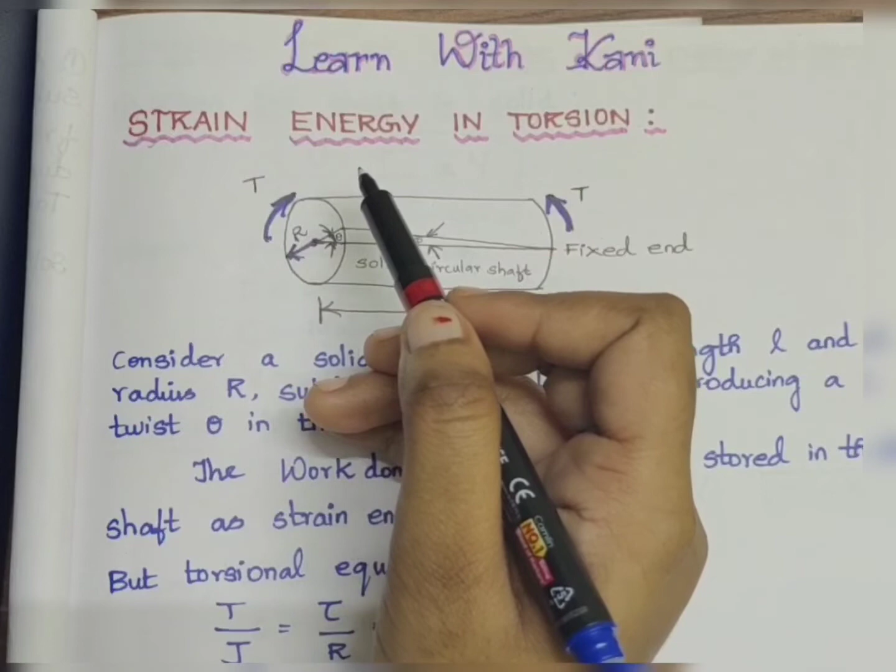Today's topic is about strain energy in torsion. Generally, what is strain energy? Strain energy is basically defined as the internal energy stored in the body when the body is subjected to a load within its elastic limit. We must ensure that the load applied over the body is within its elastic limit, that is, after removal of load, the body must regain its original dimension.

So, strain energy in torsion. Here I have drawn a solid circular shaft. Consider a solid circular shaft of length L and radius R. I have denoted the length L here, and the radius R is shown from that point to the end, that is radius, and it is subjected to a torque T, producing a twist theta along the length of the shaft.

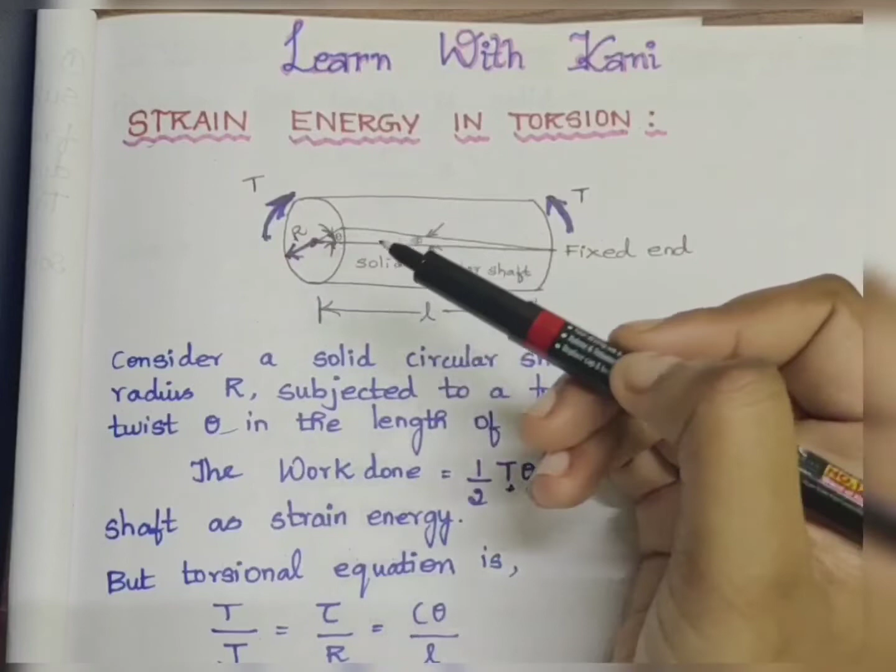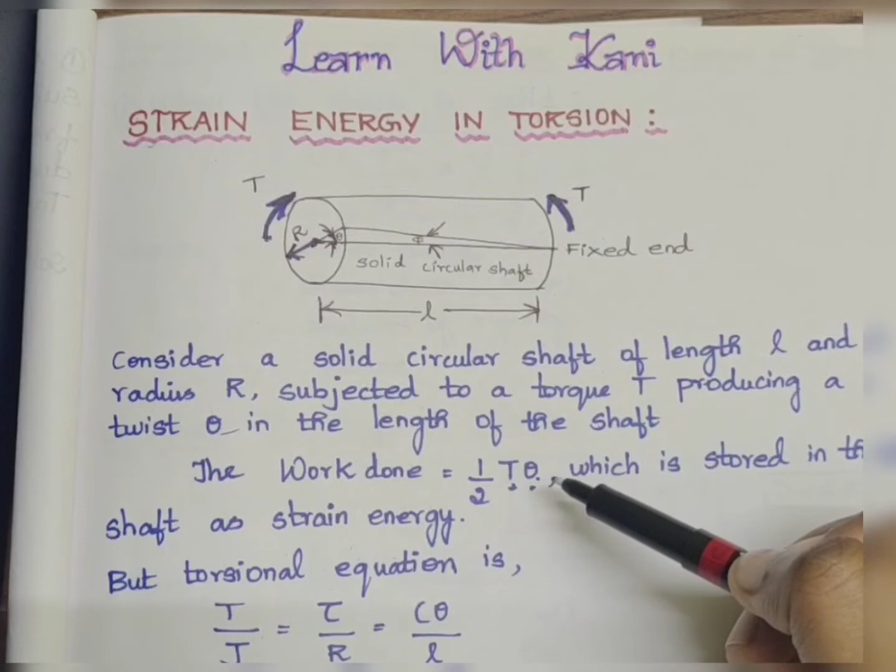Here I have drawn a torque at both sides because it acts at both sides, and due to this, an angle forms, that is the twisting angle theta, along the length of the shaft. This torque produces a twist, and this twist forms an angle theta. Now the work done is equal to half into T into theta, which is stored in the shaft as strain energy. Generally, torsional energy or strain energy is equal to the work done by the torque, which is equal to average torque into angular twist.

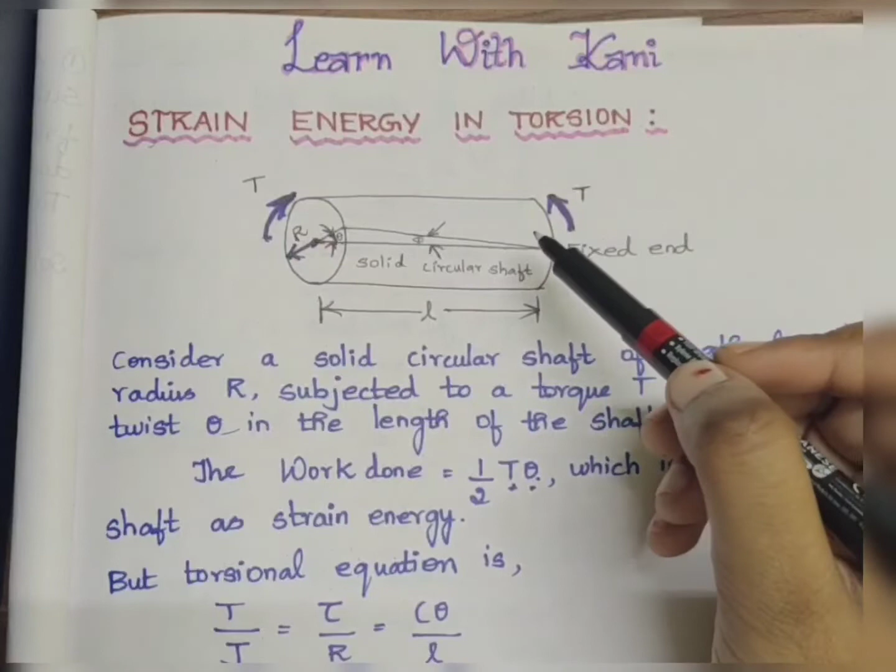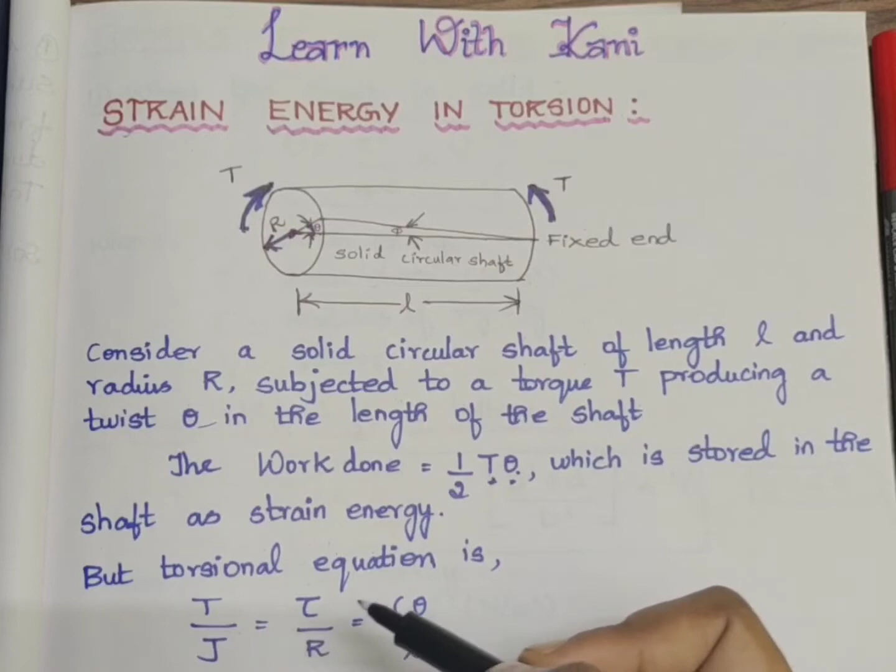Next, the torsional equation is T by J is equal to tau by R is equal to C theta by L. First, let us learn the full form of each term. T is nothing but torque applied, and its unit is Newton meter. J is nothing but polar moment of inertia, and tau is nothing but shear stress on the surface of the shaft, with unit Newton per meter square.

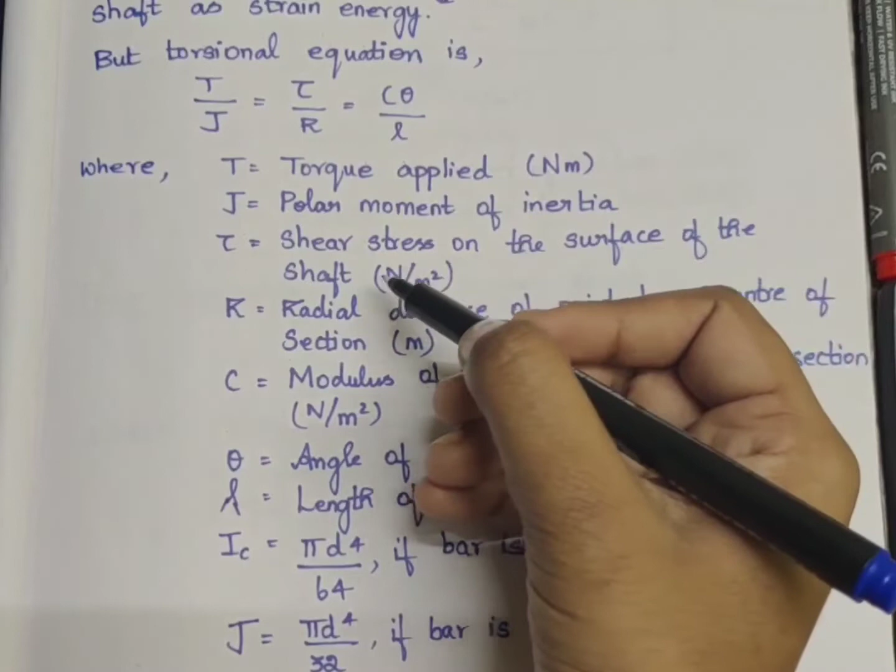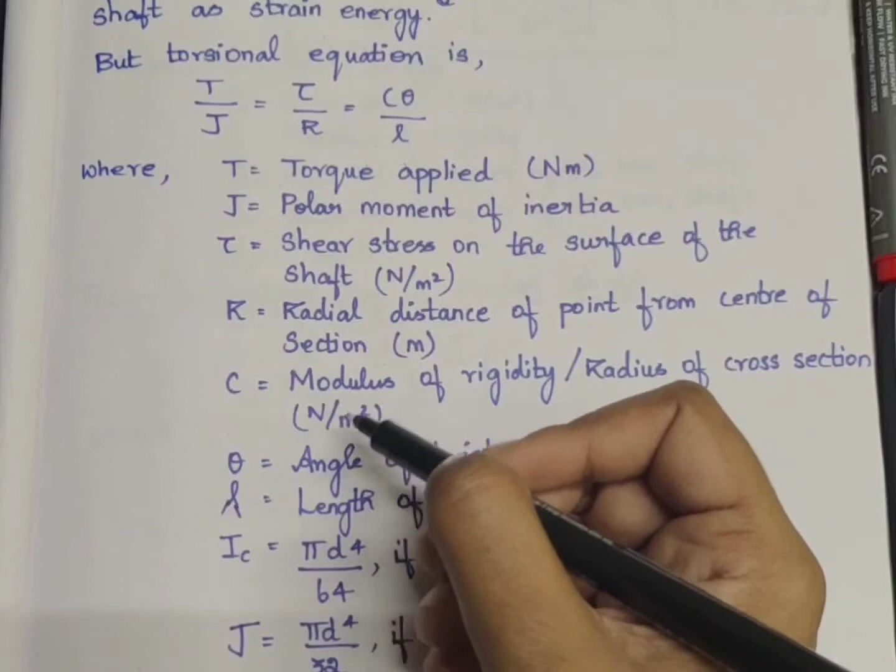R is nothing but radial distance of the point from the center of the section, and it is in meters, as it is a distance. C is nothing but modulus of rigidity, with unit Newton per meter square. Theta is nothing but the angle of twist, and L is nothing but the length of the bar or shaft, in meters.

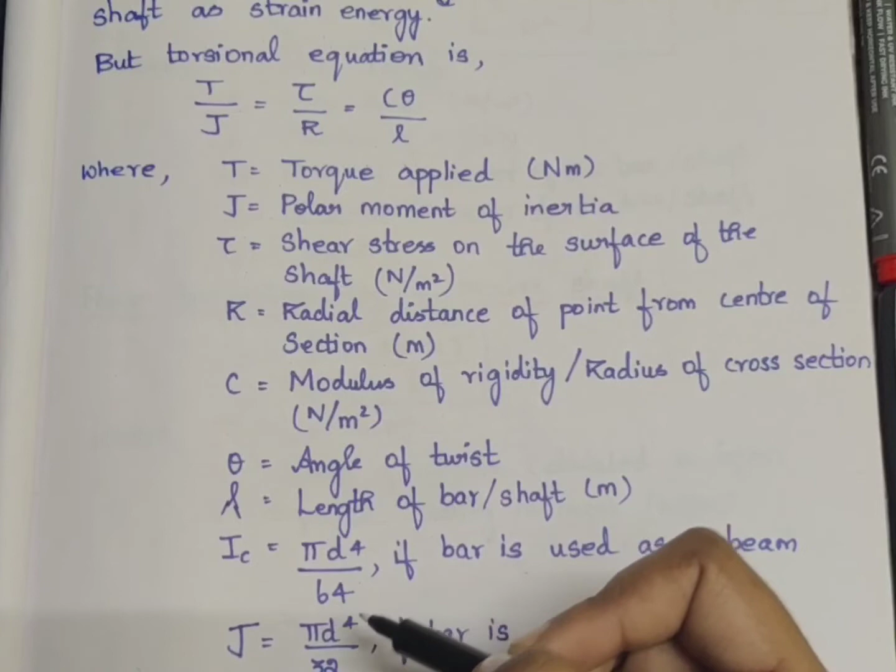IC is equal to pi d power 4 by 64 if the bar is used as a beam. If the bar is used as a beam, we should use the formula pi d power 4 by 64. If the bar is used as a shaft, then we have to use J is equal to pi d power 4 divided by 32.

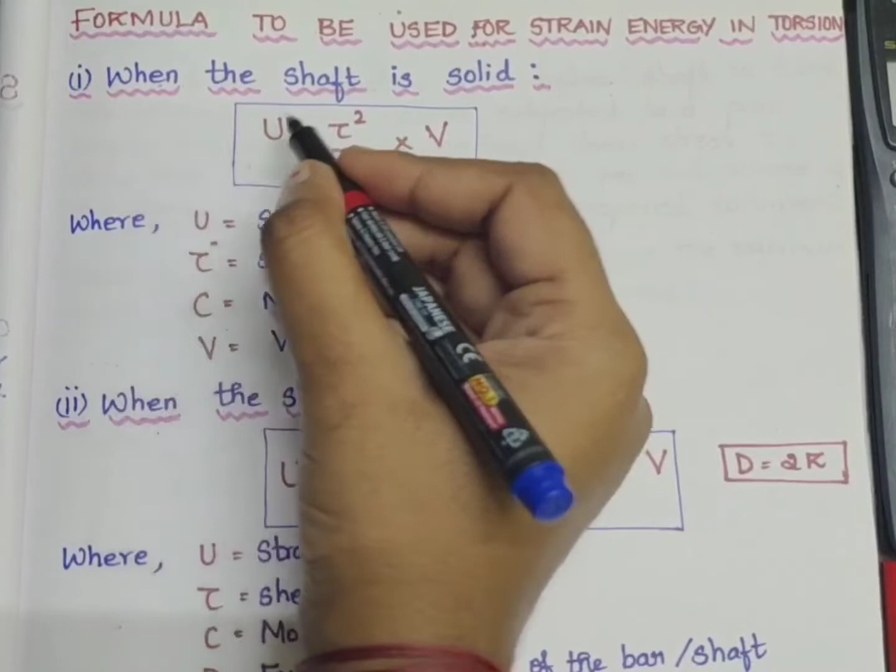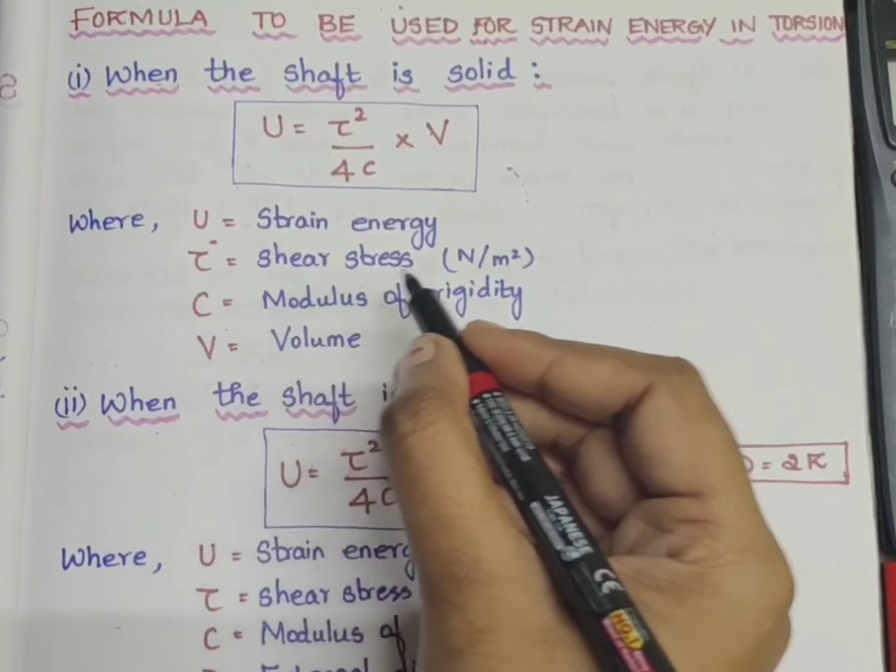Then, formulas to be used for strain energy in torsion: when the shaft is solid, U is equal to tau square divided by 4C into V, where U is the strain energy, tau is the shear stress with unit Newton per meter square, and C is the modulus of rigidity, and V is the volume.

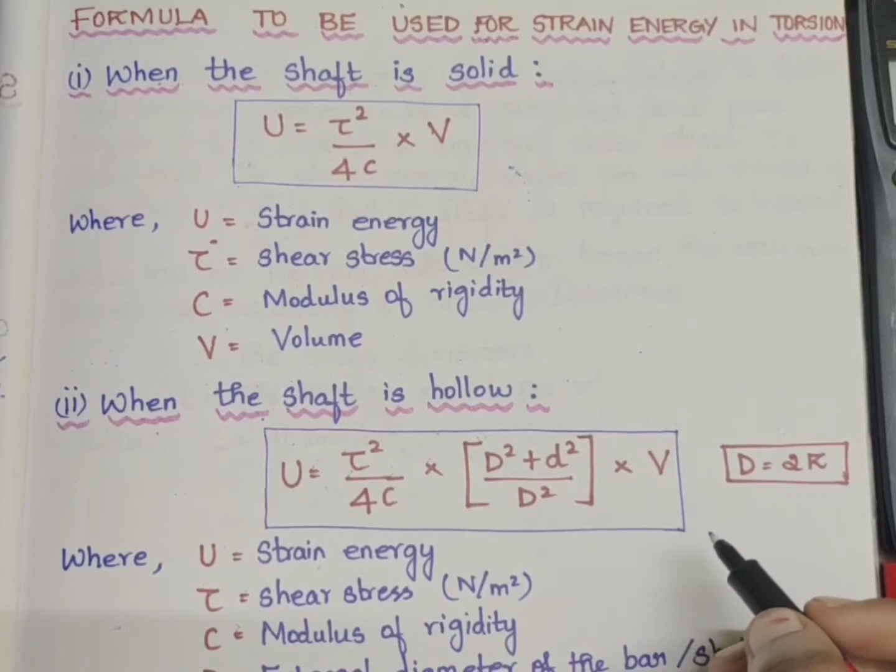When the shaft is hollow, here I have drawn a solid shaft, but in case the shaft is hollow, we have to use the formula U is equal to tau square divided by 4C into open bracket capital D square plus small d square divided by capital D square, into V. Here capital D is nothing but 2 times the radius, as we know diameter is 2 times the radius.

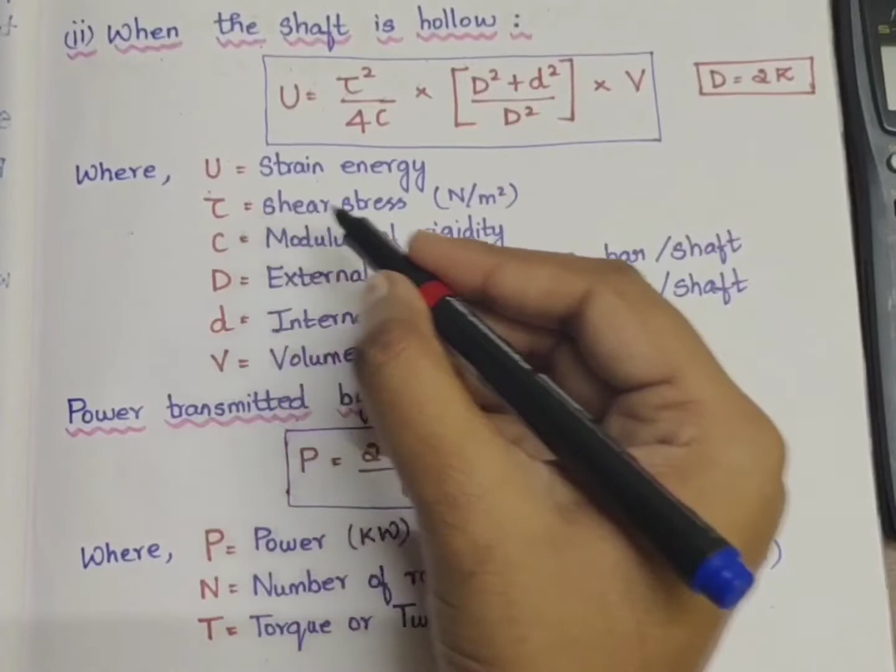Where U is nothing but the strain energy, tau is the shear stress, C is the modulus of rigidity, capital D is the external diameter of the bar or shaft, small d is the internal diameter of the bar or shaft, and V is the volume.

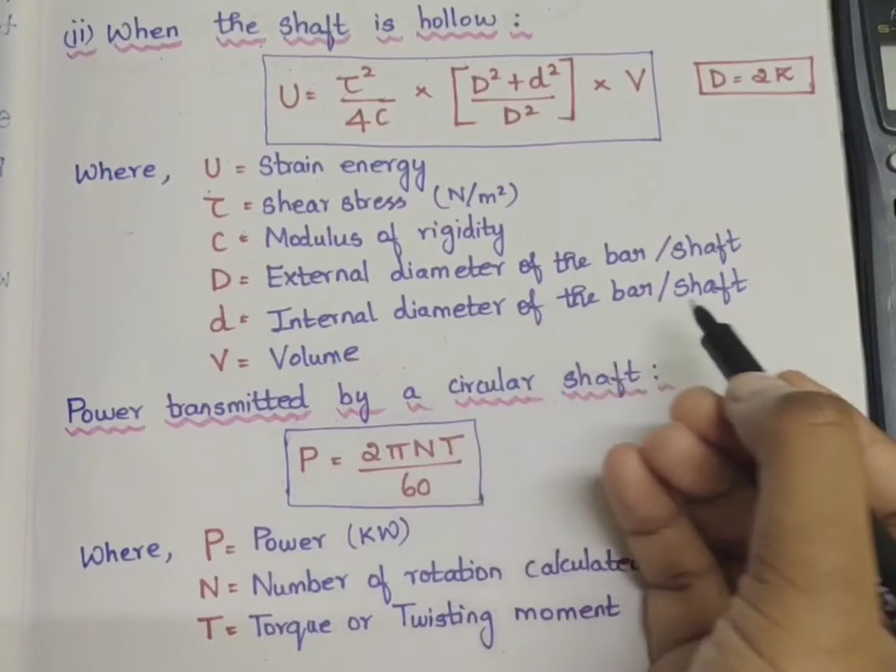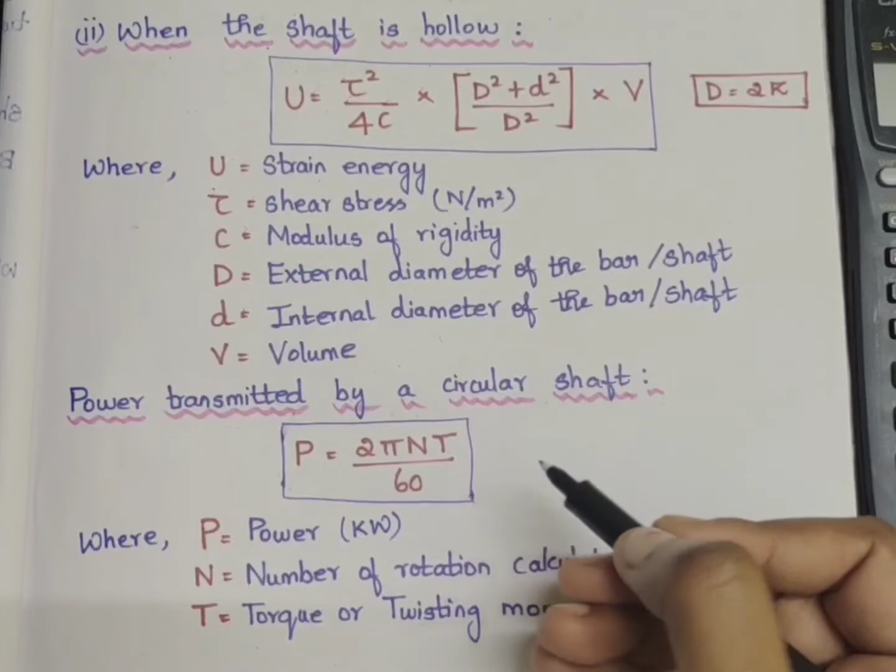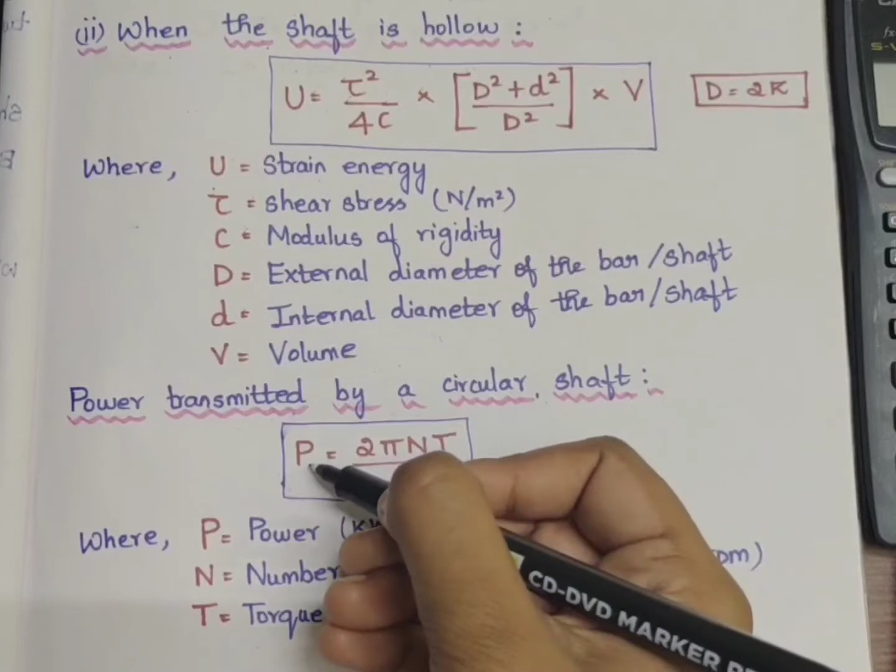Now power transmitted by a circular shaft. For this we need to use the formula P is equal to 2 pi NT by 60, where P is the power with the unit kilowatts, N is the number of rotations calculated in RPM, and T is the torque or twisting moment with the unit kilonewton meter. That is the unit for torque.

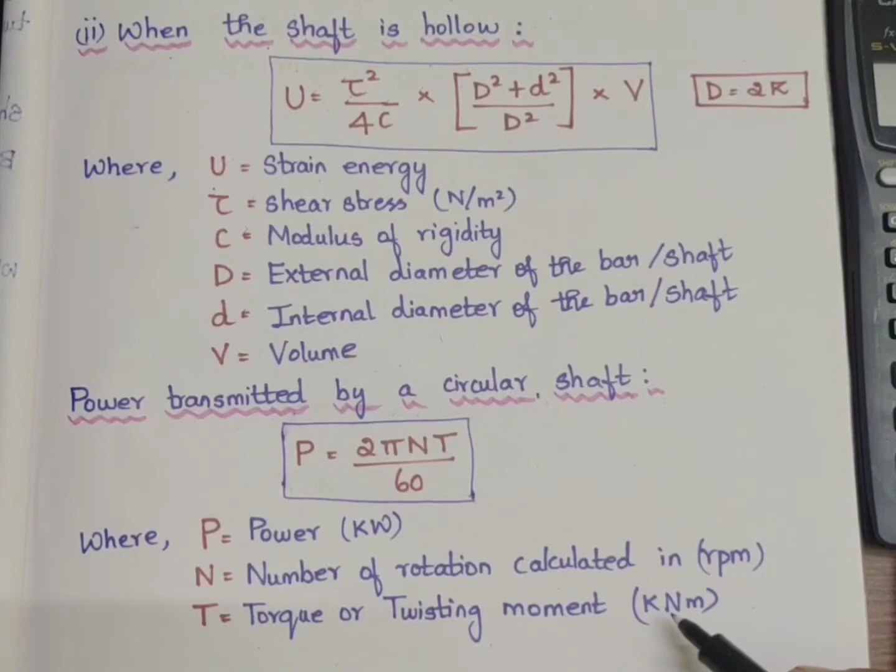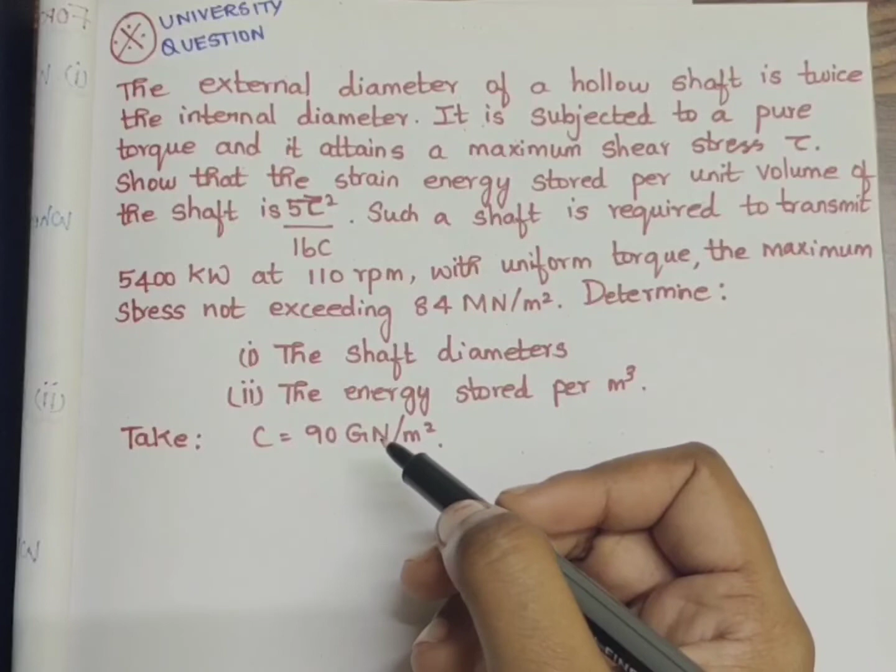Now moving on to the question. It is an important university question. The external diameter of a hollow shaft is twice the internal diameter. It is subjected to a pure torque and attains a maximum shear stress tau. Show that the strain energy stored per unit volume of the shaft is 5 tau square divided by 16C. Such a shaft is required to transmit 5400 kilowatt at 110 rpm with uniform torque. The maximum stress not exceeding 84 meganewton per meter square. Determine first the shaft diameter, second the energy stored per meter cube. Take C is equal to 90 giganewton per meter square.

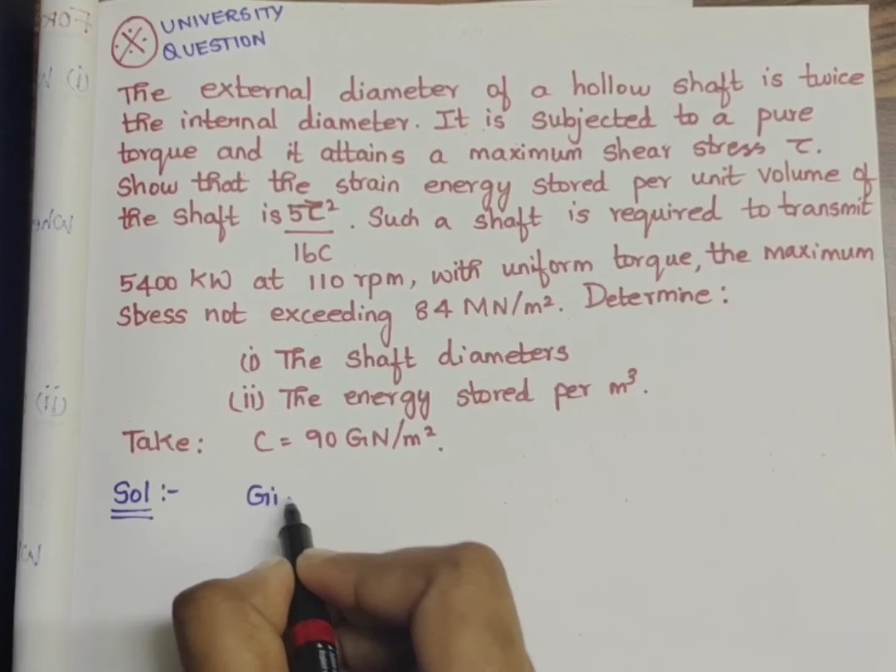Now moving on to the solution. First I am writing the given data here. In the question they have said show that the strain energy stored per unit volume of the shaft is 5 tau square divided by 16C.

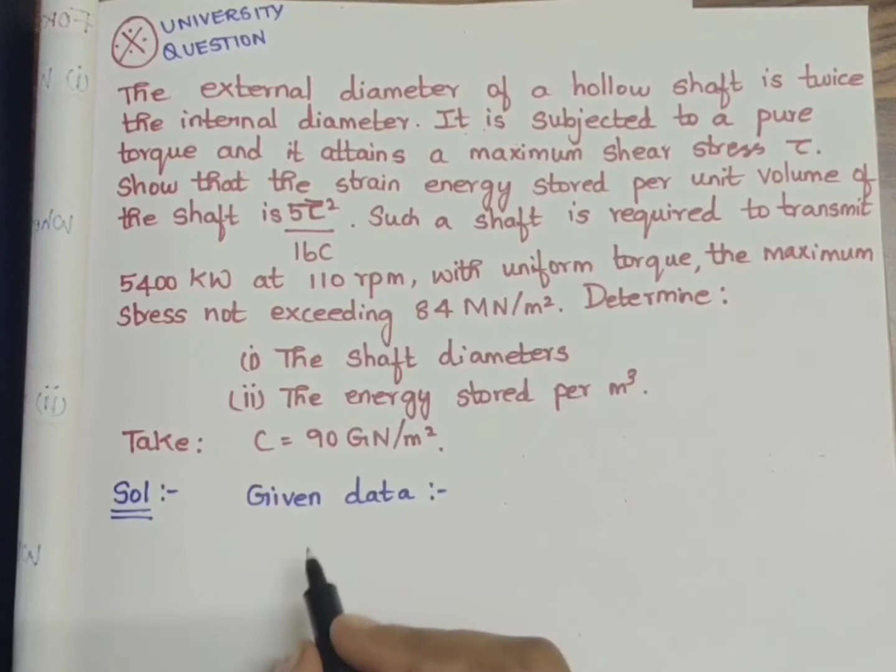So strain energy is denoted with the symbol U. Divided by unit volume they have mentioned, so divided by unit volume of the shaft is 5 tau square by 16C. I am just writing what they have given in the question.

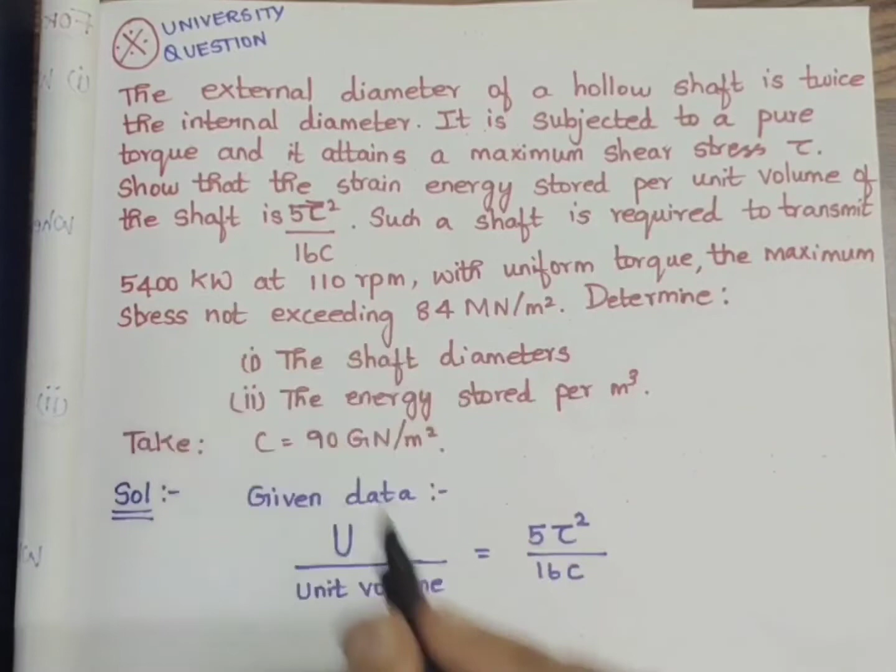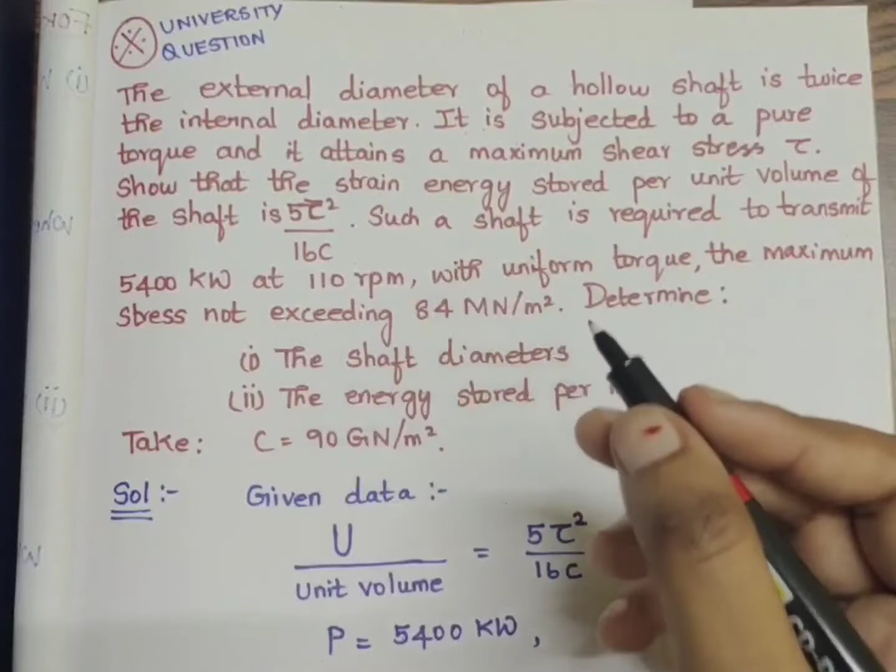Now such a shaft is required to transmit 5400 kilowatt, so they have given the power. Power P is equal to 5400 kilowatts. Now at 110 rpm, we know that rpm is denoted with n. So n is equal to 110 rpm.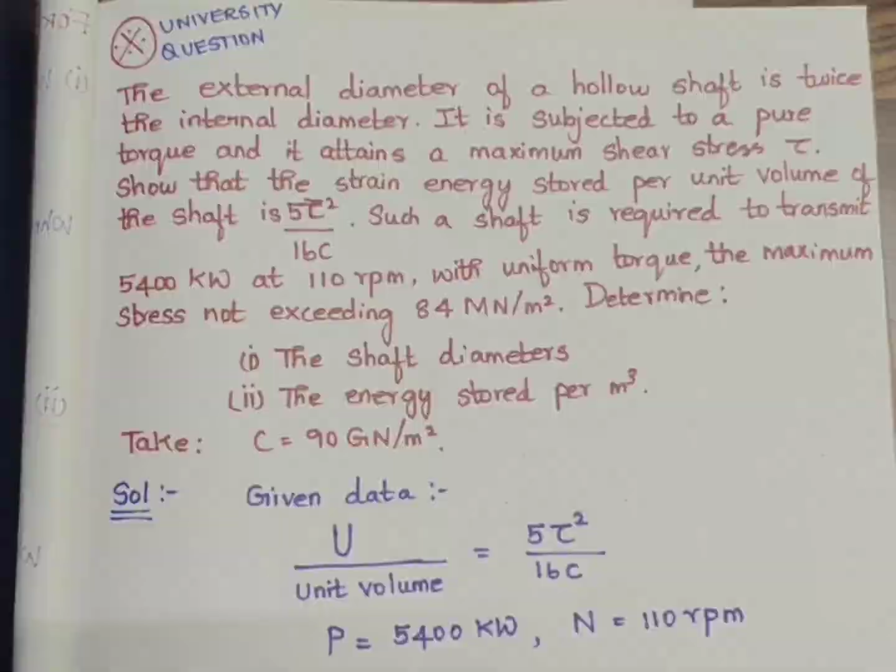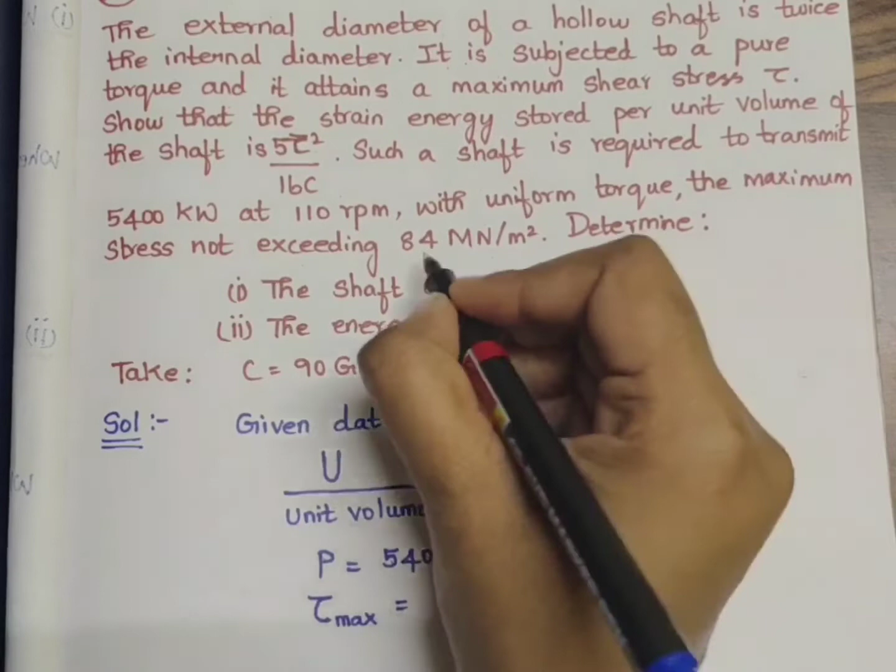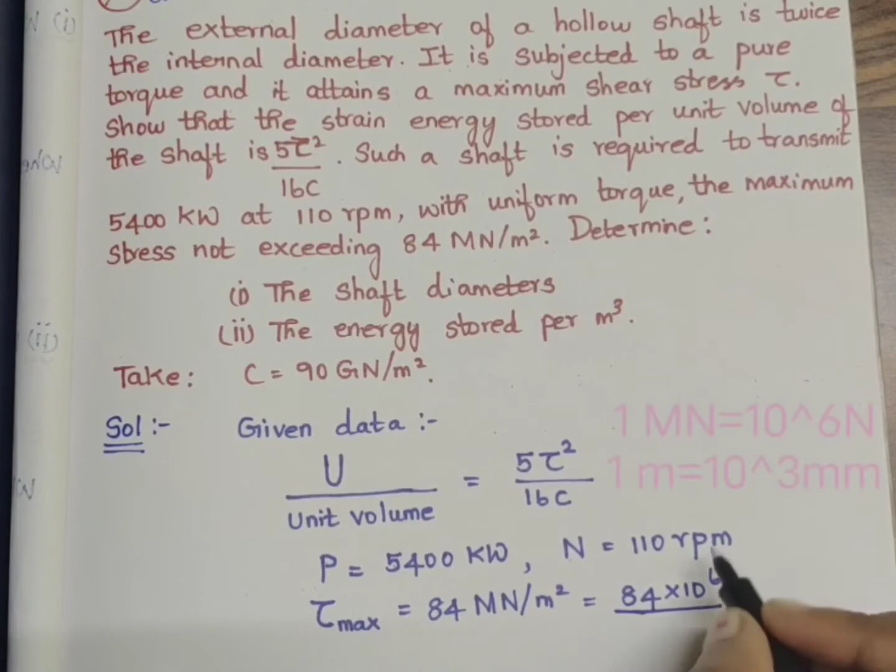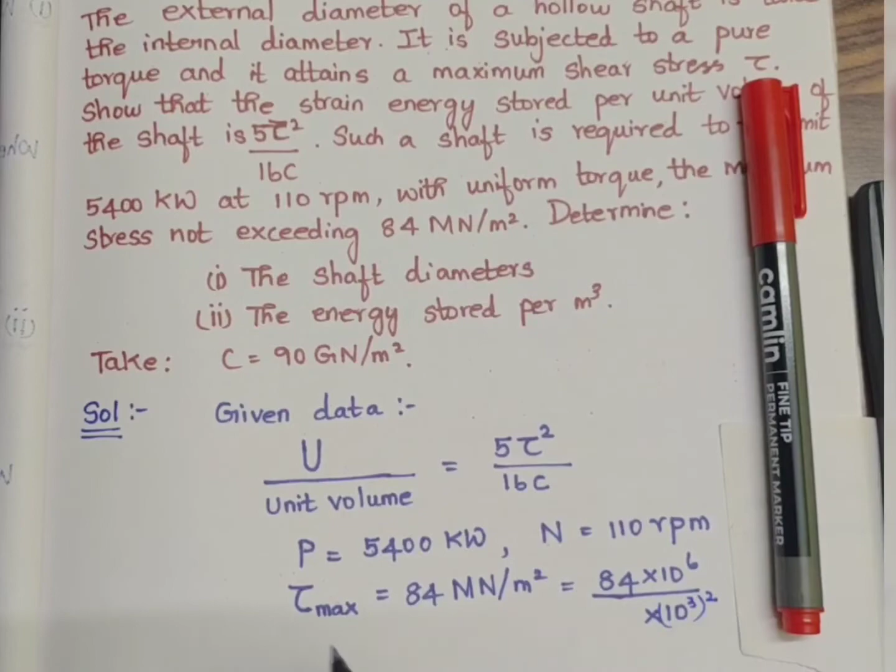Now the maximum stress not exceeding 84 meganewton per meter square. We know that stress is denoted with the symbol tau. Maximum stress, so tau max is equal to 84 meganewton per meter square. Now we are going to convert it into newton per mm square for easy calculation. We know that 1 meganewton is equal to 10 power 6 newton and 1 meter is equal to 10 power 3 mm. Just doing a simple conversion from meganewton and meter to newton and mm square: 84 into 10 power 6 divided by meter square, so 10 power 3 the whole square, which is 10 power 6. Cancelling both, it will be 84 newton per mm square.

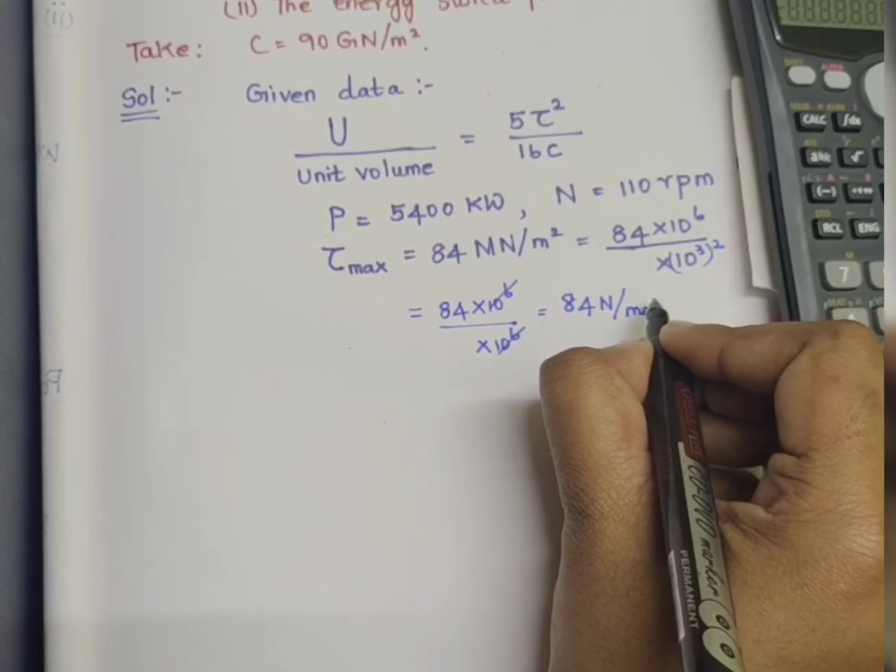So tau max is equal to 84 newton per mm square. We are just converting this for the purpose of units. So tau max is equal to 84 newton per mm square.

Now power is equal to 5400 kilowatt. We have to convert this into watts. It is nothing but 1 kilowatt is equal to 1000 watts. So applying this for conversion, I am writing 5400 into 10 power 3 watts.

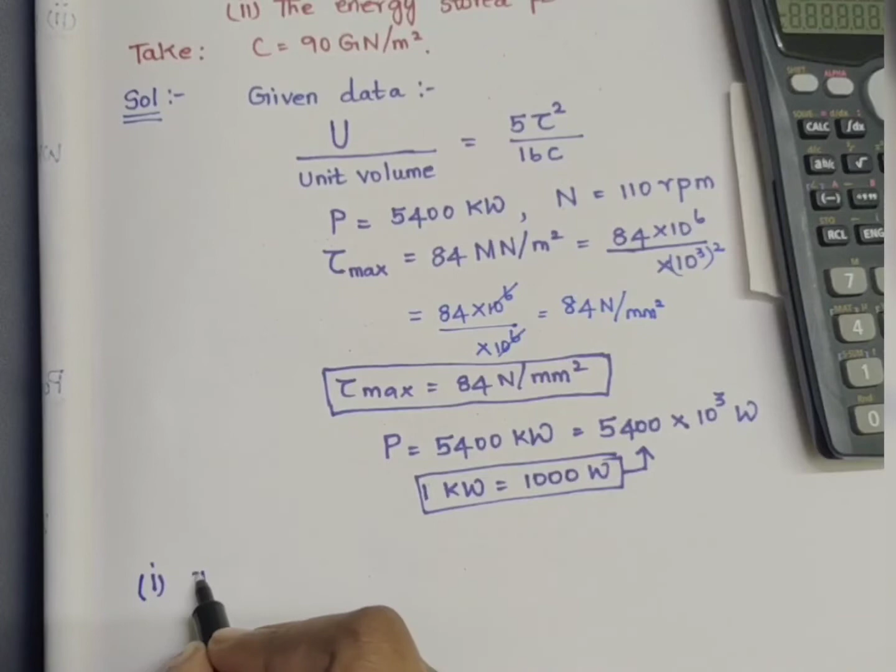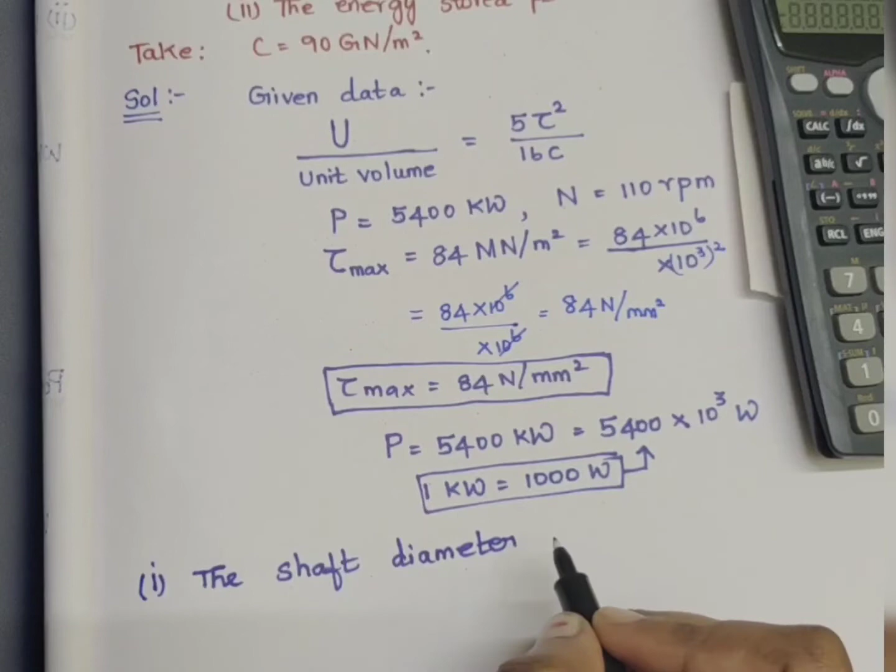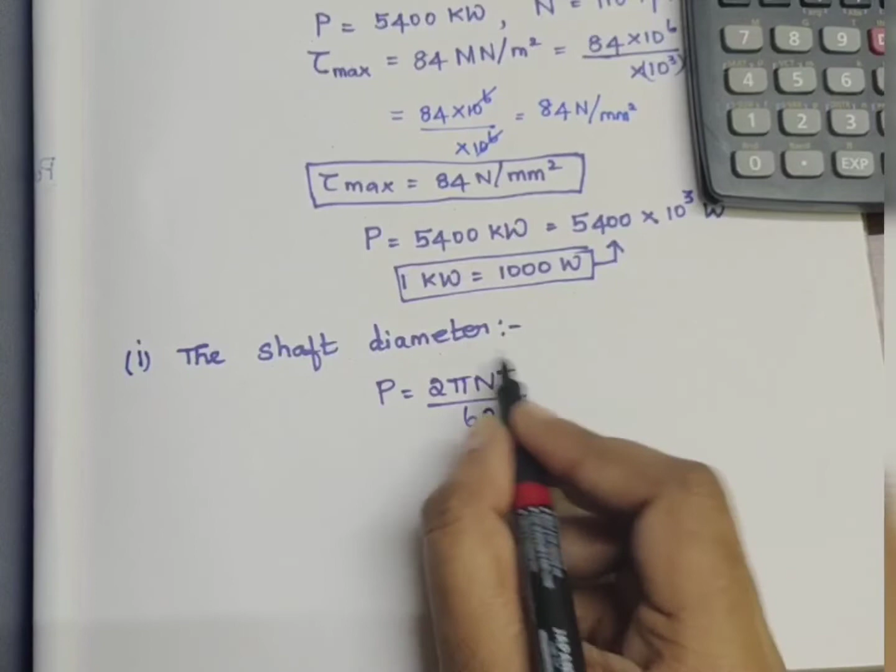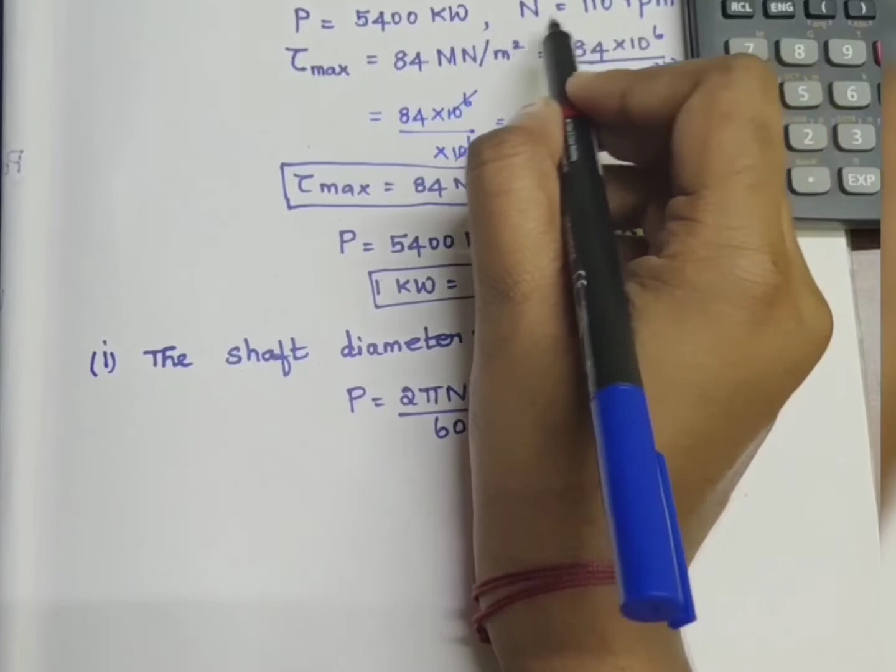Now in the question they have asked us to determine the shaft diameter. So the first part is the shaft diameter determination. For this we are going to use the power formula, P is equal to 2 pi NT divided by 60. We are using this formula because they have given the power value and n value, and when we find T, with that we can go with the torsional equation, and with the torsional equation we can find the diameter. That is the logic here.

So to determine T we are using this power formula, as they have given the values related to power and number of speed, that is n. So just rearranging this, T is equal to P into 60 divided by 2 into pi into n.

So value of P is 5400 into 10 power 3 into 60 divided by 2 into pi into n, where n is nothing but 110. I'm just showing how to do this in the calculator.

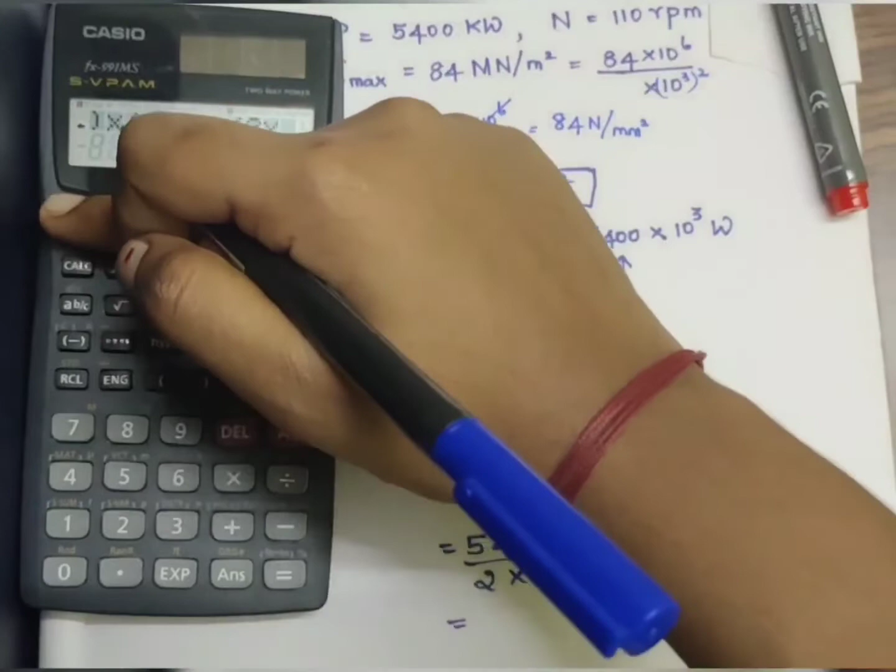First give double bracket, then 5400 into 10 power 3, close the bracket, then into open bracket 60, close it, close the overall bracket, then divided by, open bracket, 2 into pi. We are just going to substitute pi as pi itself, not 3.14. Just giving shift and exp, we get the pi symbol, then into 110, closing the bracket. So the value is 4 6 8 7 8 3.

I am just leaving after the point value, so it is just 468783 Newton meter, as torque unit is Newton meter. I'm just writing that T is equal to 468783 Newton meter, so into 10 power 3 Newton mm, for just a conversion purpose, converting meter into mm.

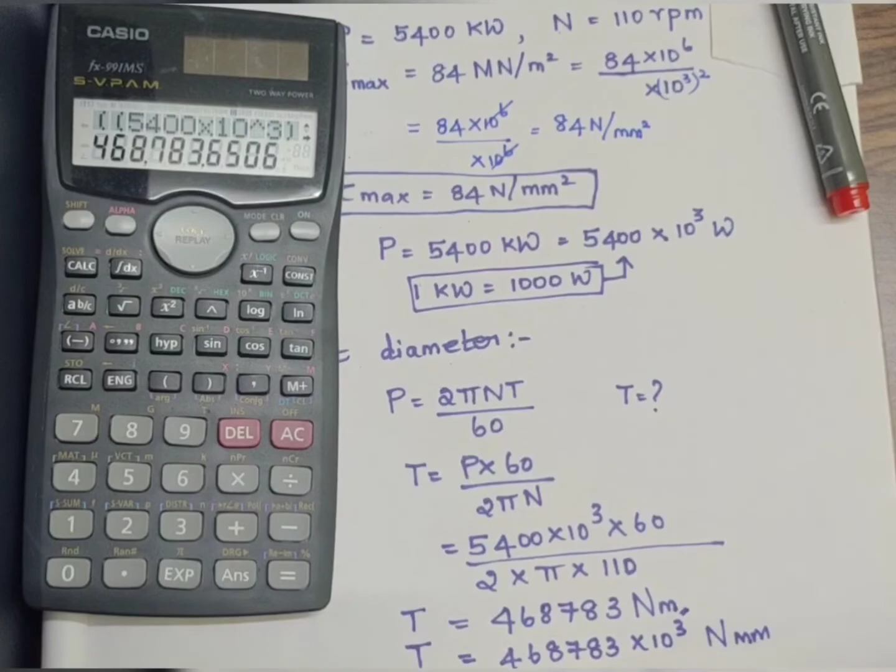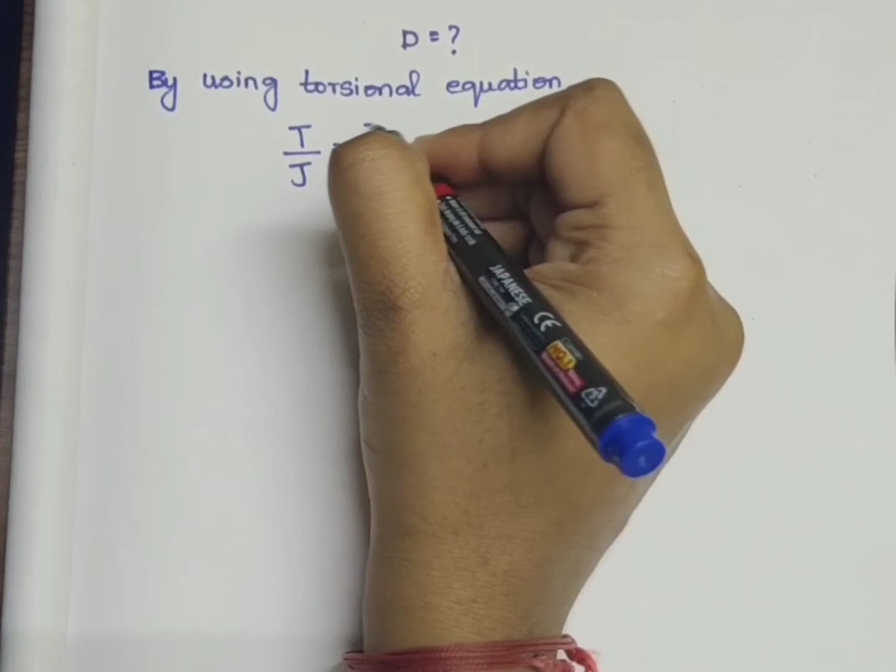Now to determine D, that is the diameter, by using torsional equation, as we have found the value of torque by using the power, now we are using torsional equation to find the value of D. See how I am doing that. By using torsional equation, generally torsional equation is T by J is equal to tau by R is equal to C theta divided by L. This is the general equation.

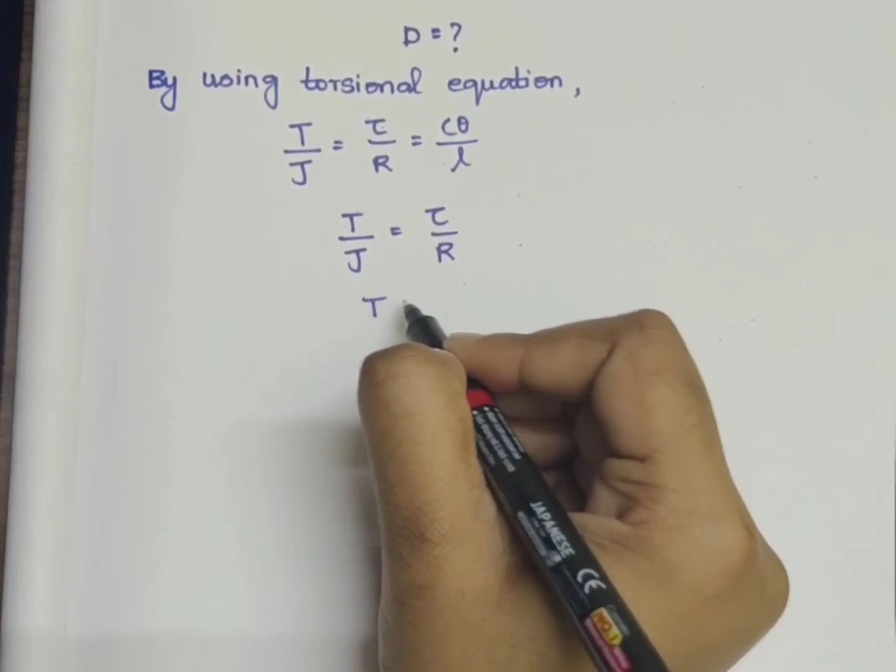Now T by J is equal to tau by R. This is the required part, because we know these values only. We don't know about C theta by L, we don't know anything related to that. So just ignoring that and doing with this equation, T is equal to J into tau by R, where we know that

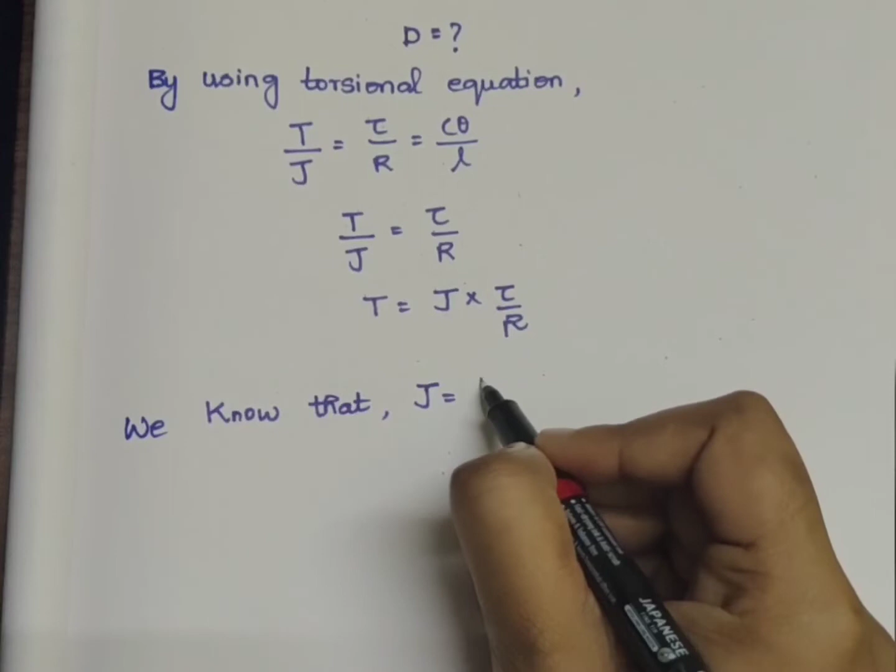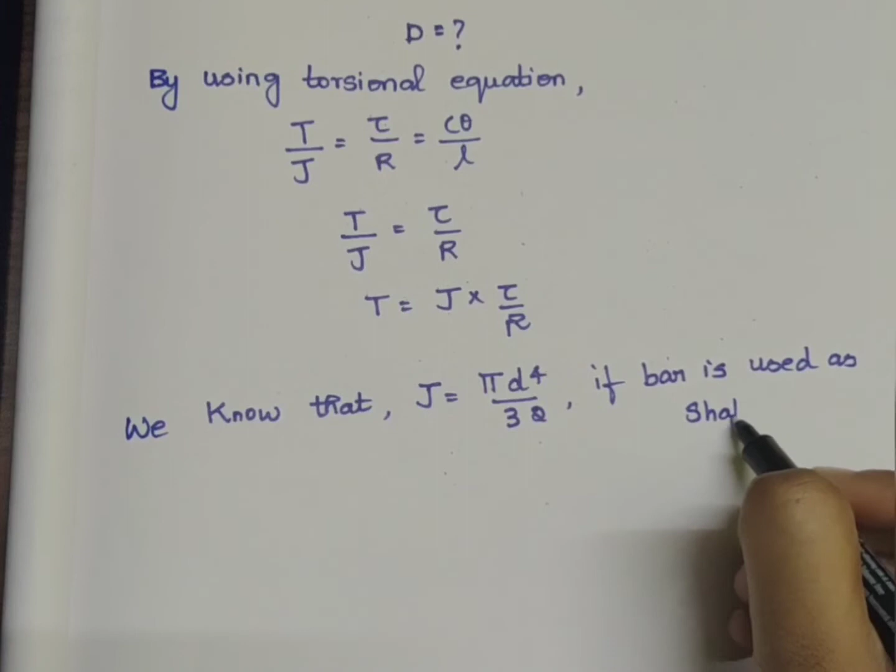J is equal to pi d power 4 divided by 32. Why did I write this? Because if the bar is used as shaft, we need to use this formula only, as I mentioned earlier. In the question they have given that it is a shaft, so we are using J is equal to pi d power 4 by 32. So T is equal to pi divided by 32 into d power 4.

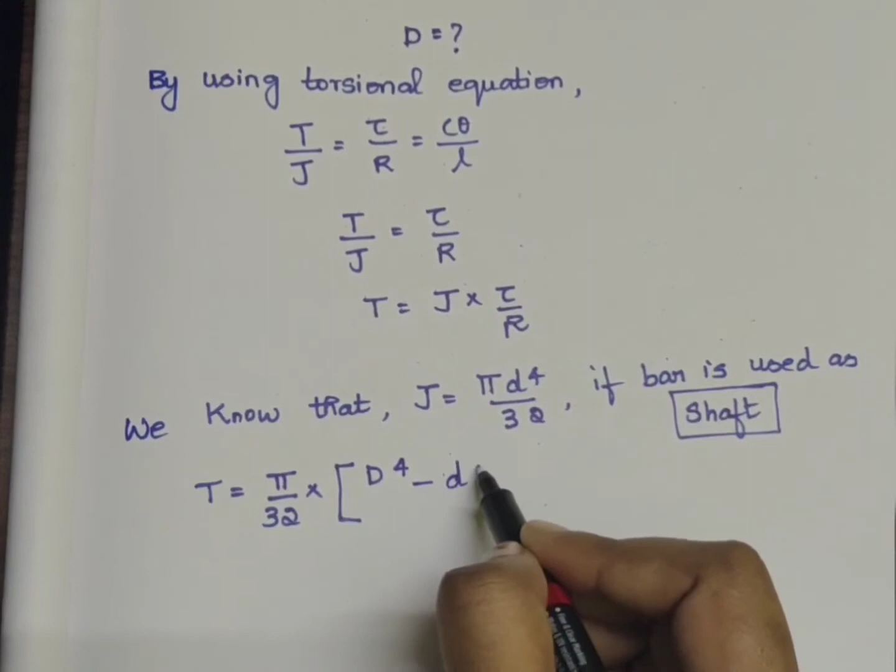Here in the question they have clearly mentioned that it is a hollow shaft. So capital D power 4 minus small d power 4, into tau divided by r, is nothing but d by 2, because d is 2r, so r is nothing but d by 2. I am just writing that here, r is equal to d by 2. Radius is nothing but half of the diameter, right? So it is just a simple thing.

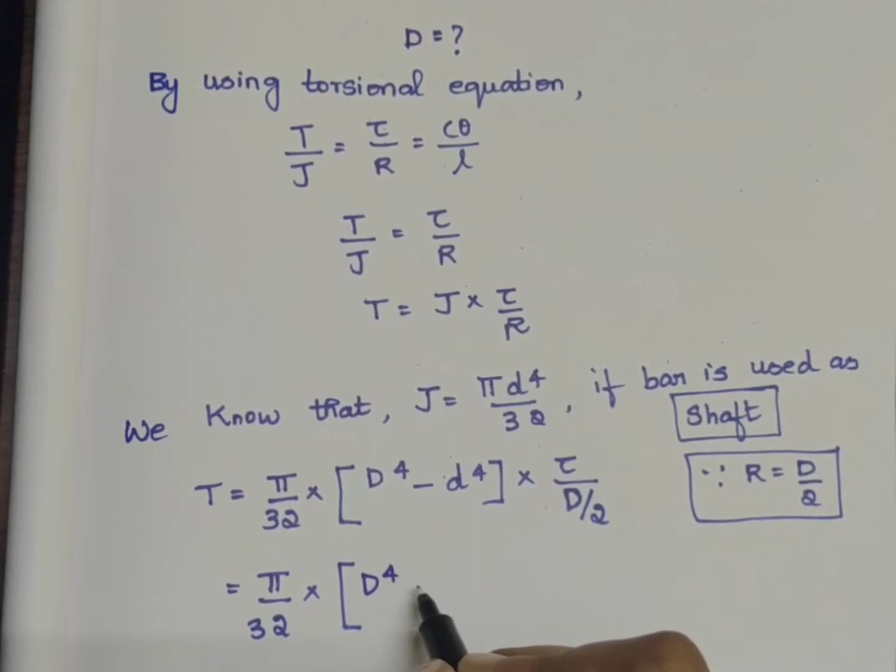Now which is equal to pi by 32 into d power 4 minus this small d power 4. We need to note in the question that the external diameter of a hollow shaft is twice the internal diameter. So the capital D is twice the internal diameter, the external diameter is twice the internal diameter.

We need to substitute the small d with capital D by 2, because capital D is 2 times the small d. So writing that here, in place of small d, capital D by 2 the whole power 4, closing the bracket. Now I am taking that d part which is outside, that is the tau by d, that capital D inside into this bracket, so divided by capital D into tau, just moving that d, capital D inside. It is just a simple math only.

So pi by 16 into, open the bracket, d power 4 minus d power 4 divided by 2 power 4 is nothing but 16, divided by capital D, closing the bracket, into tau. Now which is equal to pi by 16, open the bracket, just doing a simple math thing, that is just multiplying and dividing 16 into d power 4 minus d power 4 divided by 16, the whole divided by capital D into tau.

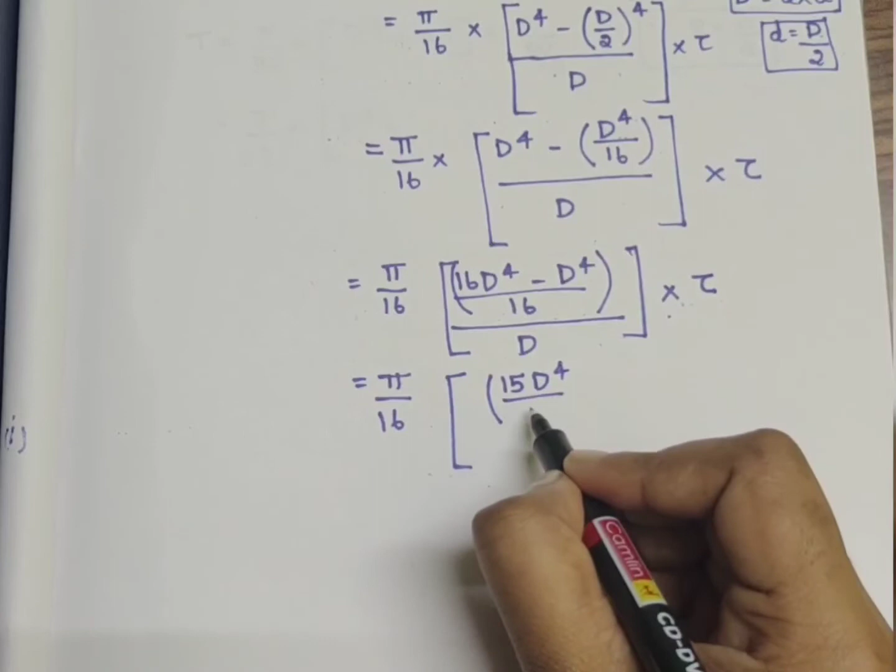So which is equal to pi by 16 into 16 d power 4 minus d power 4, is nothing but 15 d power 4 divided by 16, close the bracket, whole divided by capital D, close the bracket, into tau, which is equal to pi by 16, open the bracket, 15 d power 4 divided by 16 into, this D is nothing but D by 1 generally, so I am just making it inverse, so into 1 by D into tau.

Pi by 16, which is equal to pi by 16 into 15 d power 4 divided by 16 into d, 16d, okay, into tau. Now cancelling d, so it is d cube, so pi by 16, open the bracket, 15 capital D cube divided by 16 into tau.

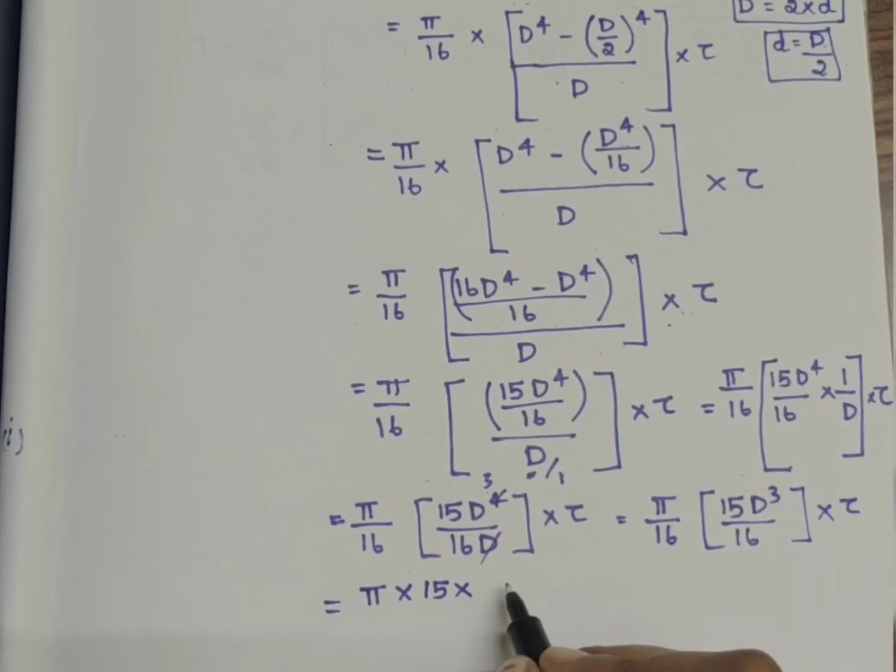Which is equal to pi into 15 into capital D cube into tau divided by, just multiplying all the thing and dividing it with 16 into 16, which is nothing but 256.

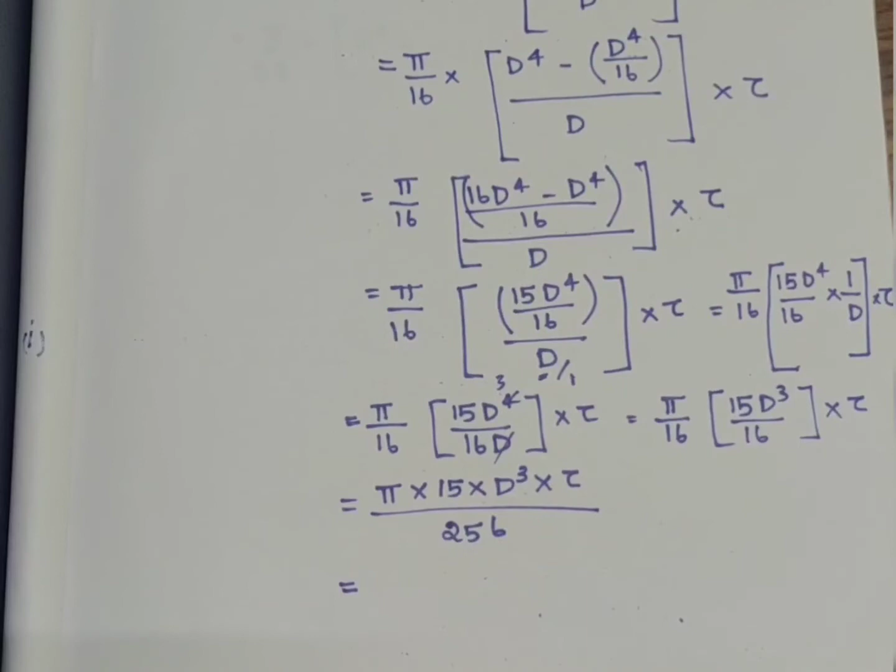Now this is nothing but T is equal to J into tau by r. So in the place of left hand side it will be capital T, which is equal to pi into 15 into d cube into tau divided by 256. This T we have already calculated from the power formula. So 468,783 into 10 power 3, which is equal to pi into 15 into d cube into tau max, because in the question they have given tau max only, so we are using tau max divided by 256.

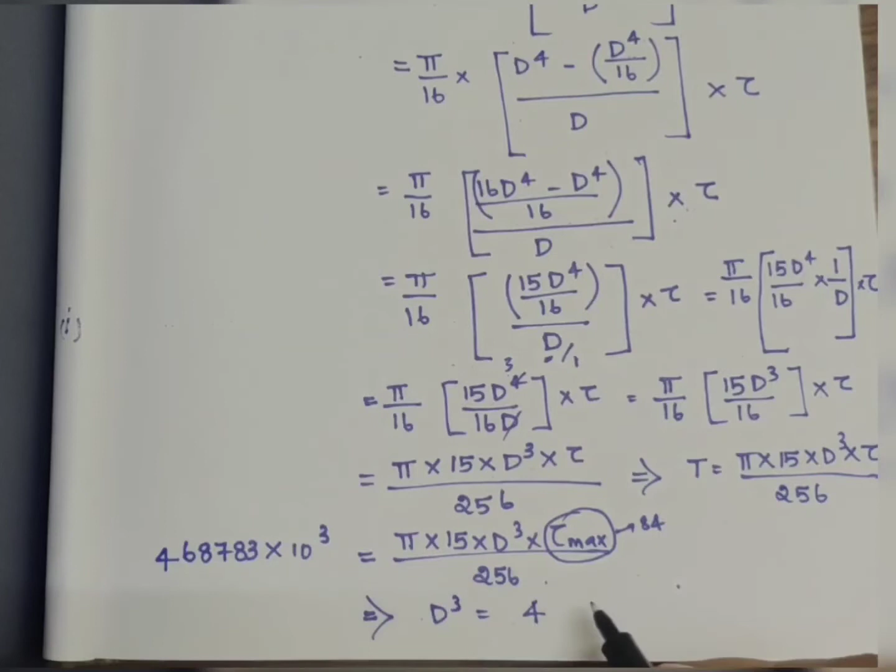We know that in the question they have given tau max as 84. So substituting that here, and just rearranging to keep d cube on one side and move all other terms to the other side: that is 468783 into 10 power 3 into 256, because I am keeping d cube at one side. So it's just simple math to do this, divided by pi into 15 into tau max which is 84.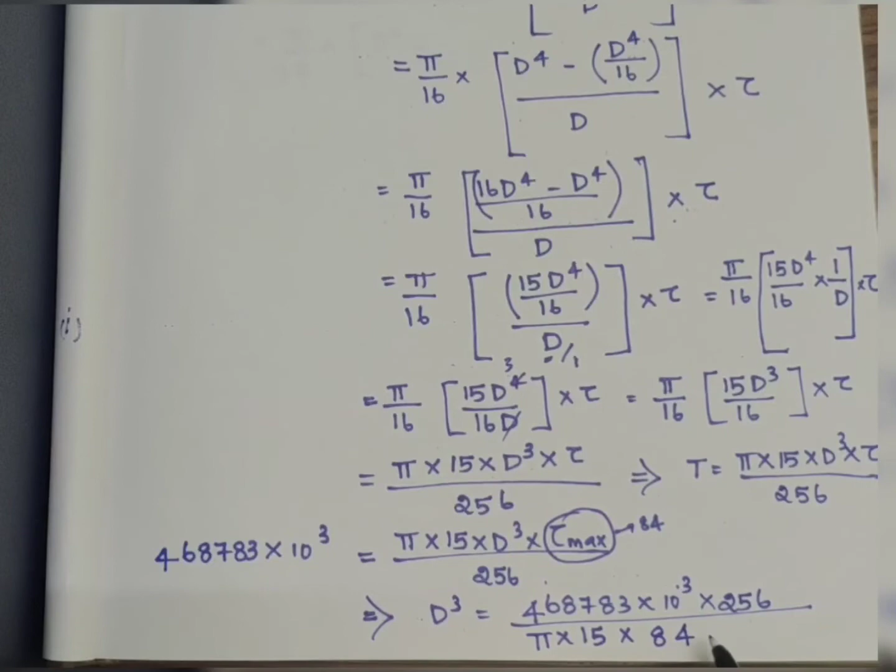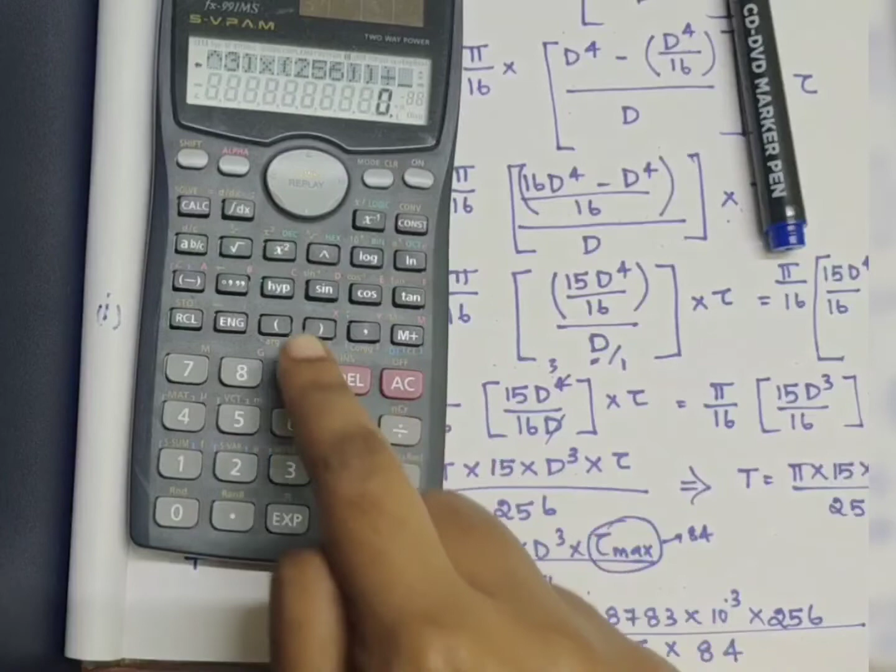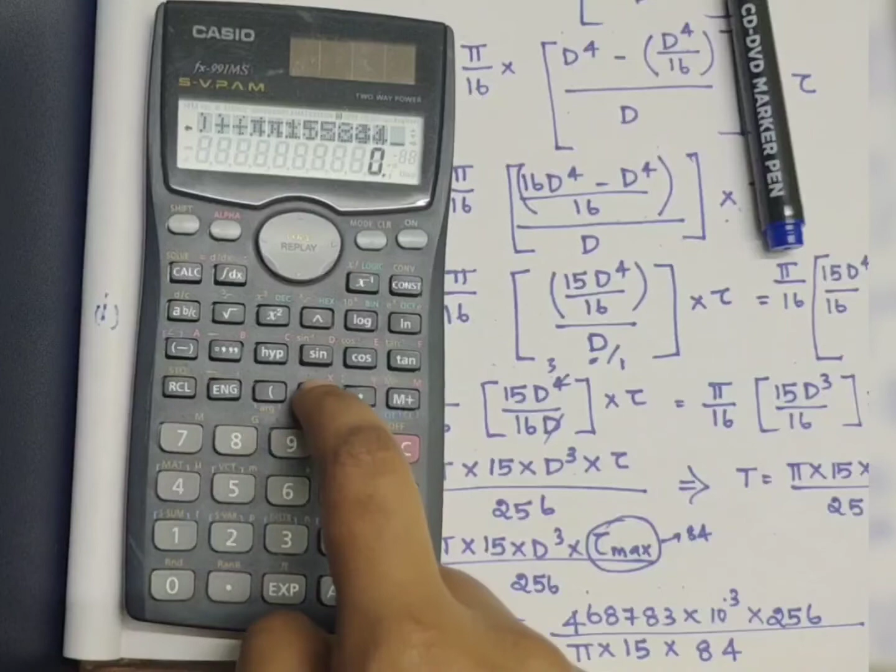So now let me show how to do this in the calculator. First, open double bracket, then 468783 into 10 power 3, close the bracket, into open the bracket 256, close the bracket and close the double bracket, divided by open the bracket. I am just giving pi as pi itself, so pi into 15 into 84, close the bracket. So the value is...

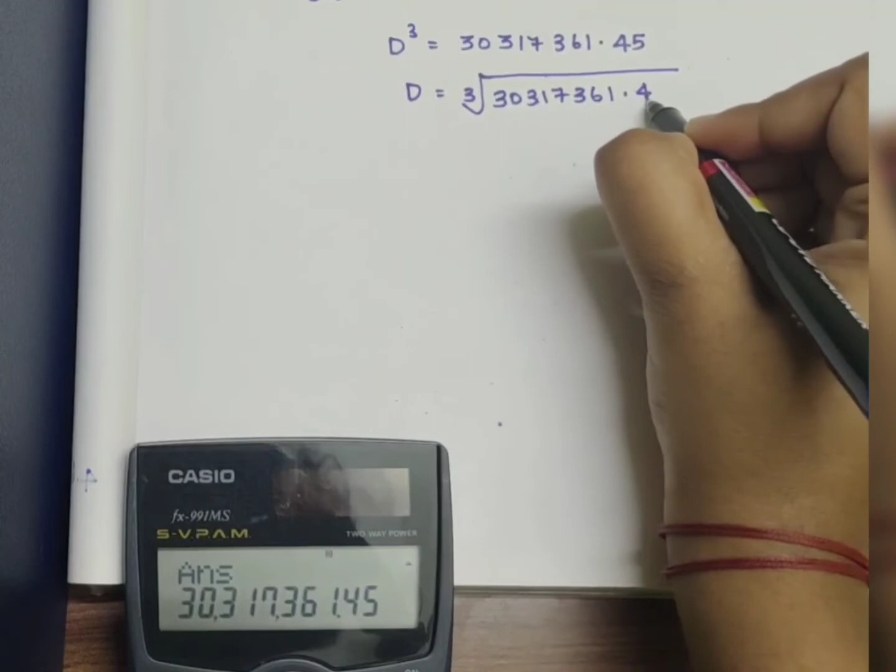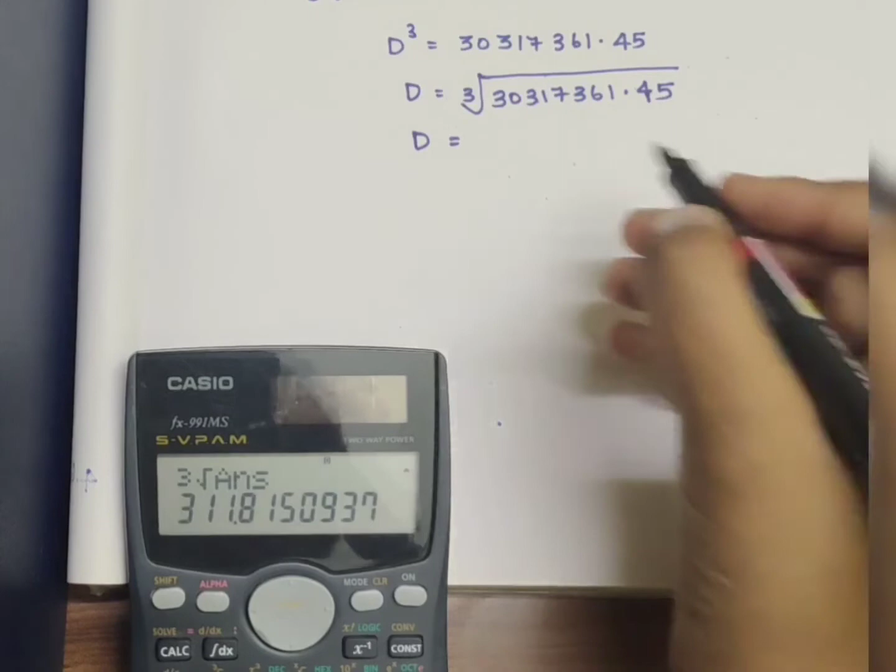See here in the calculator, it is d cube is equal to 30317361.45. So d is nothing but cube root of 30317361.45. I am just doing that in the calculator and I will show the value of d now. See, cube root of the answer, that is, it is nothing but 311.81.

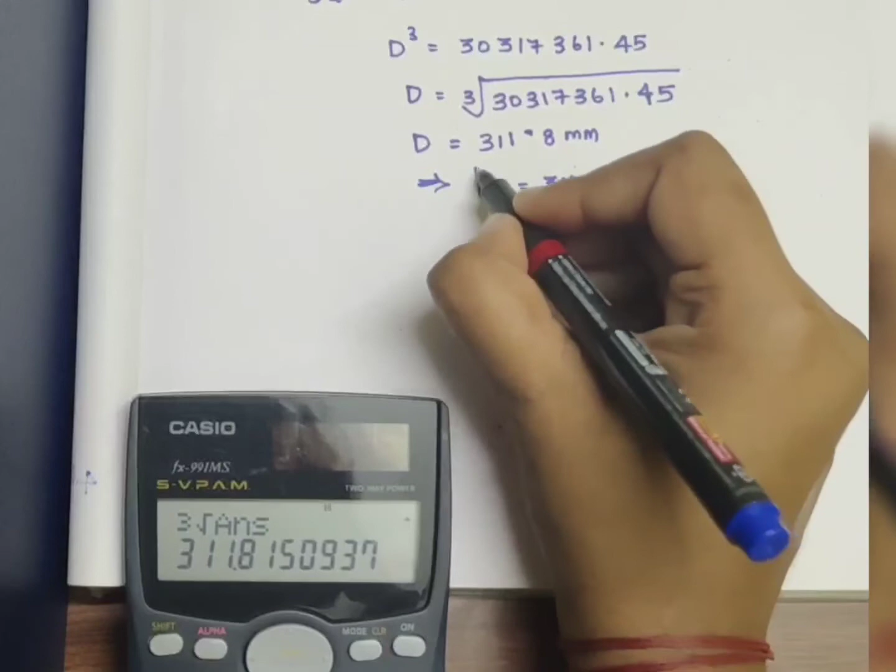So diameter is 311.8 mm. So we have found the shaft diameter, that is 311.8 mm. This is the answer for the shaft diameter, that is the external diameter.

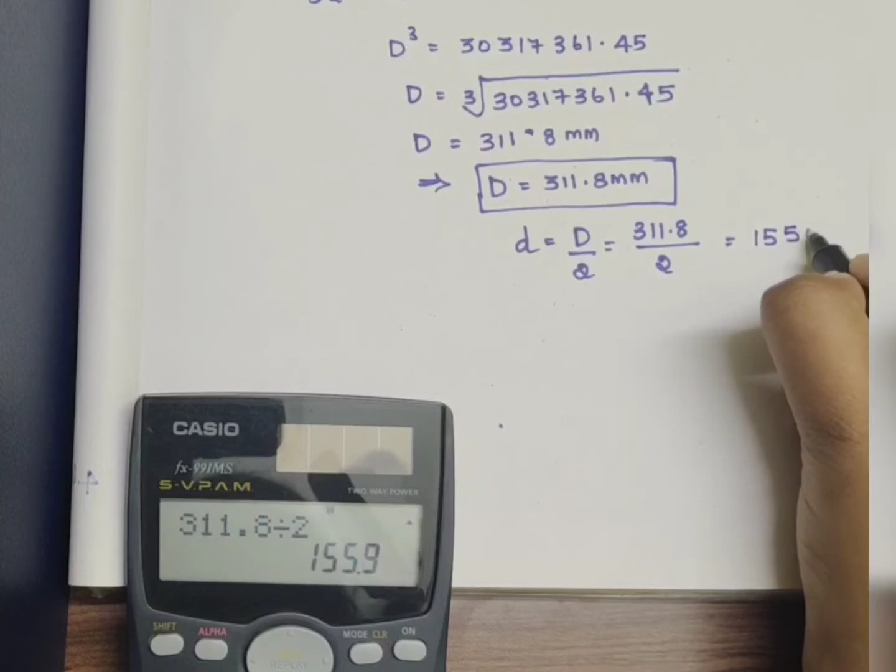Now the internal diameter is capital D by 2. So 311.8 divided by 2, which is nothing but, I will just do it in the calculator, 311.8 divided by 2. See, it is 155.9. That is the internal diameter. So from this we have arrived at the external diameter and internal diameter of the shaft.

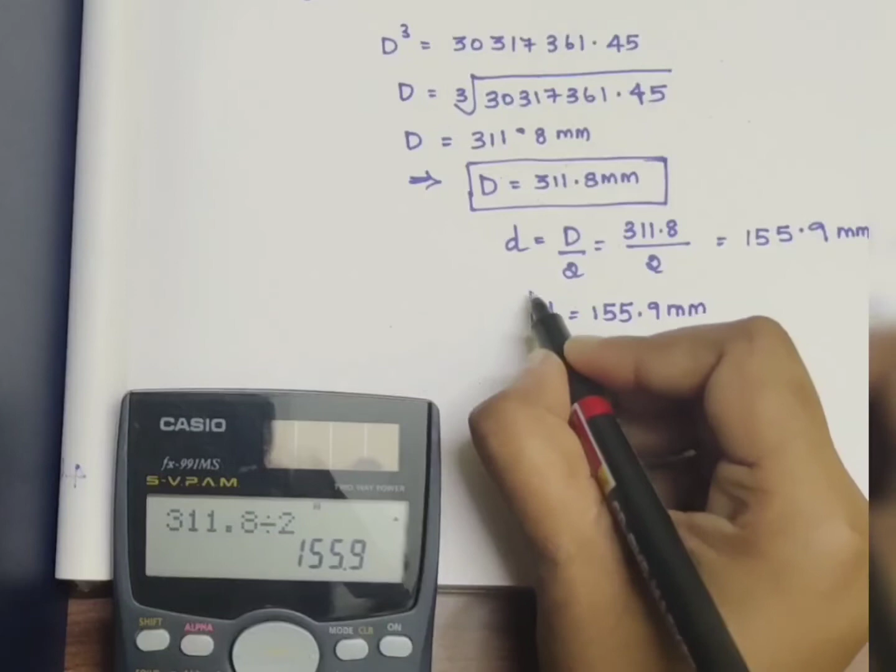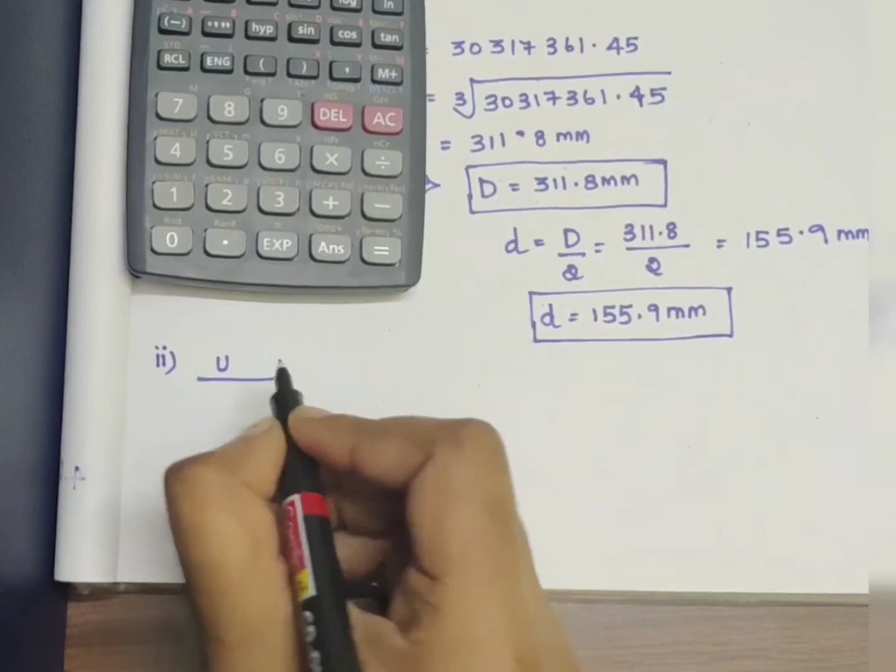So first part is over. Now moving on to the second part. In the second part they have given that the energy stored per meter cube. So energy is nothing but the strain energy per meter cube. Meter cube means it is the volume only, so U by volume. In the question already they have given that strain energy per unit volume is 5 tau square by 16 C.

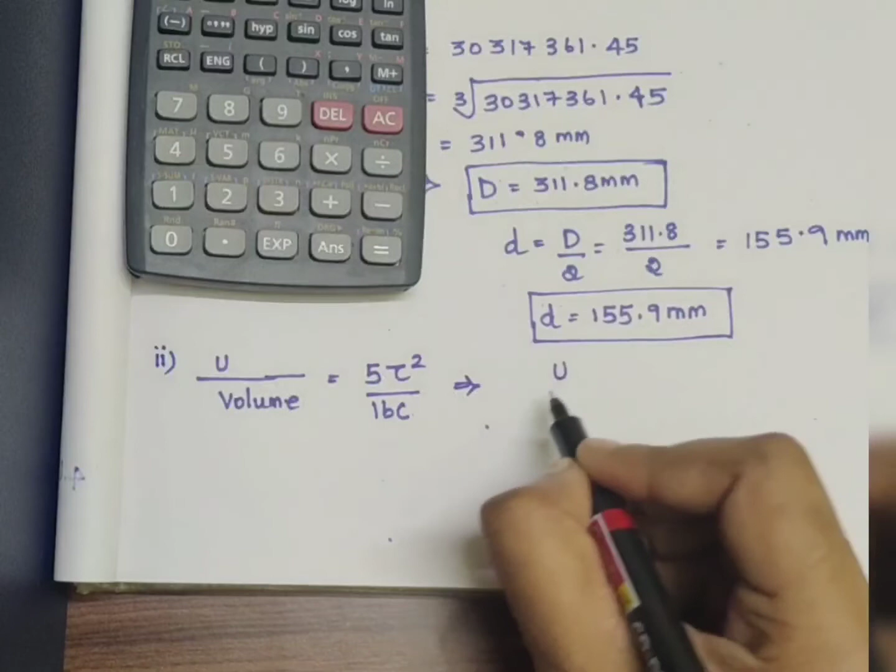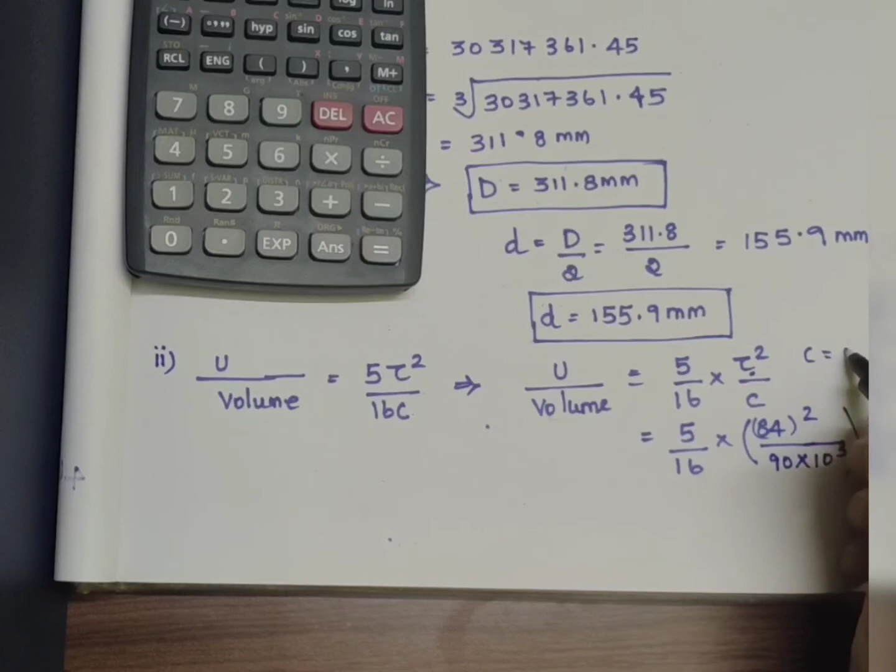Now we are just going to calculate that stored energy per unit volume value. So U divided by volume is equal to 5 divided by 16 into tau square divided by C. Just keeping constants at one side, I am doing that. So 5 by 16 into tau square. Tau is nothing but the shear stress. Already we know the value of tau max, that is 84. So 84 the whole square divided by C, that is 90 into 10 power 3, the value they have given for C in the question, which is C is equal to 90 into 10 power 3. 10 power 3 I am using because 1 gigapascal is 10 power 3 Newton per mm square, just a unit conversion.

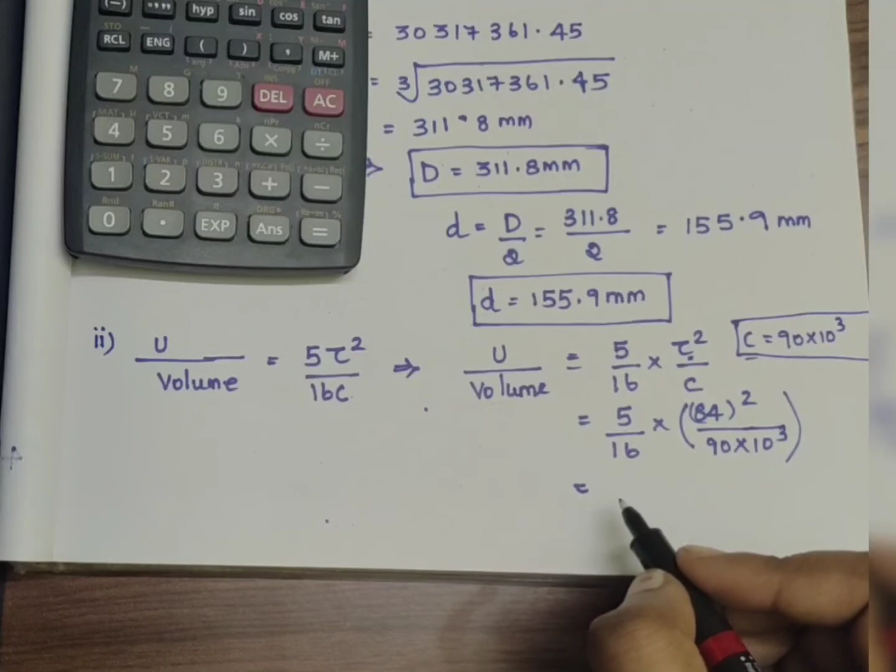Now calculating this in the calculator, I will show that. I'm just showing how to do this calculation in the calculator. So open double bracket 5 divided by 16, close the bracket, into open triple bracket and then 84 close the bracket, whole square, close the bracket. So I have completed that part, and then divided by, open the bracket, 90 into 10 power 3, and then close the bracket, close the overall bracket. So the value is, what we have arrived is...

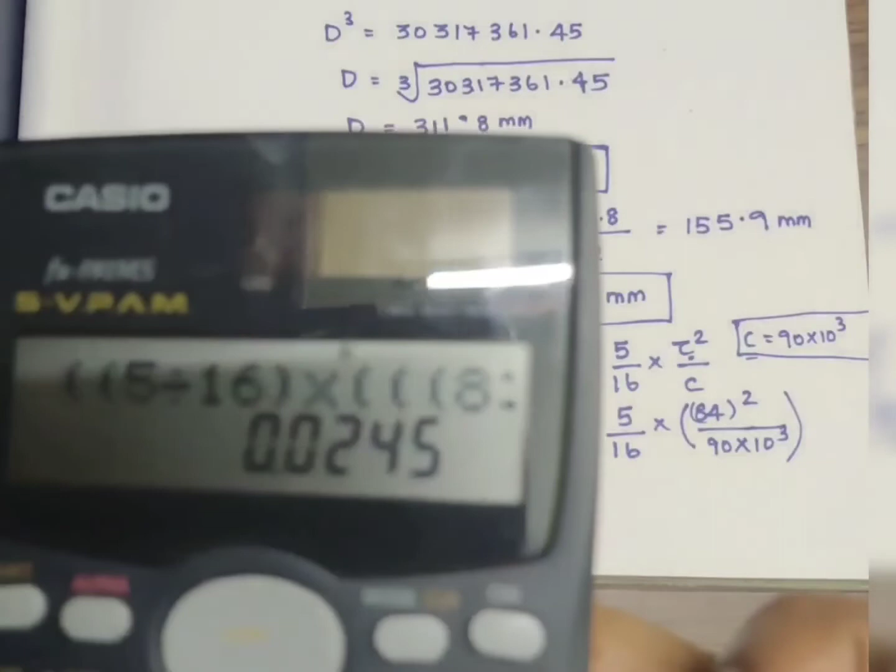0.0245. I hope it is clear. So the answer is 0.0245 Newton mm. Here I am just moving the decimal point 3 places to the right, and moreover I am converting mm to meter, that is into 10 power minus 3. So overall it will be like 24.5 into 10 power minus 6 Newton meter.

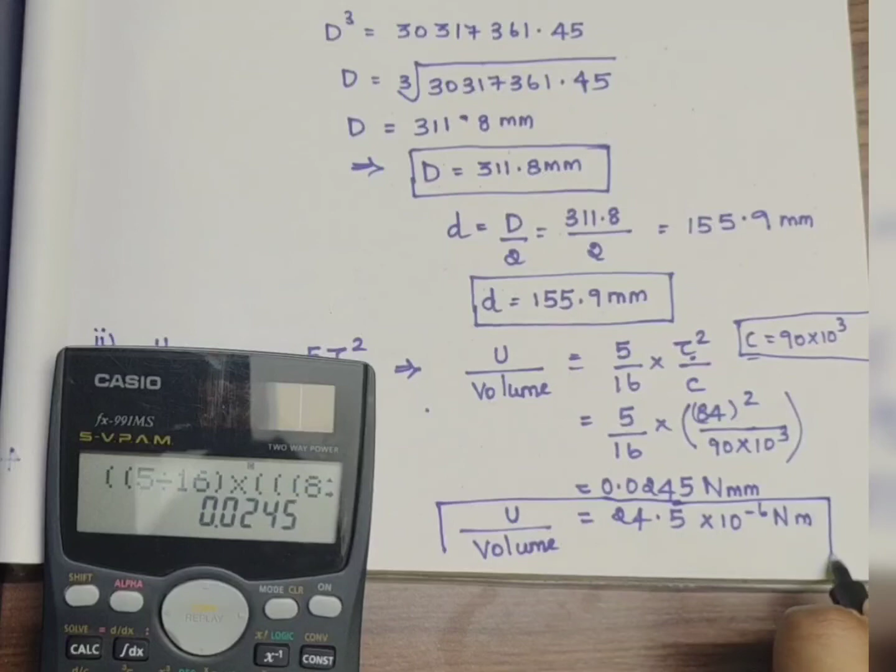Finally we have arrived at the energy stored per meter cube. This is the value for the question. So this is the end part of this question 2. Finally we have arrived at the shaft diameter, that is the internal diameter, external diameter, and energy stored per unit volume. This is the end of the solution.